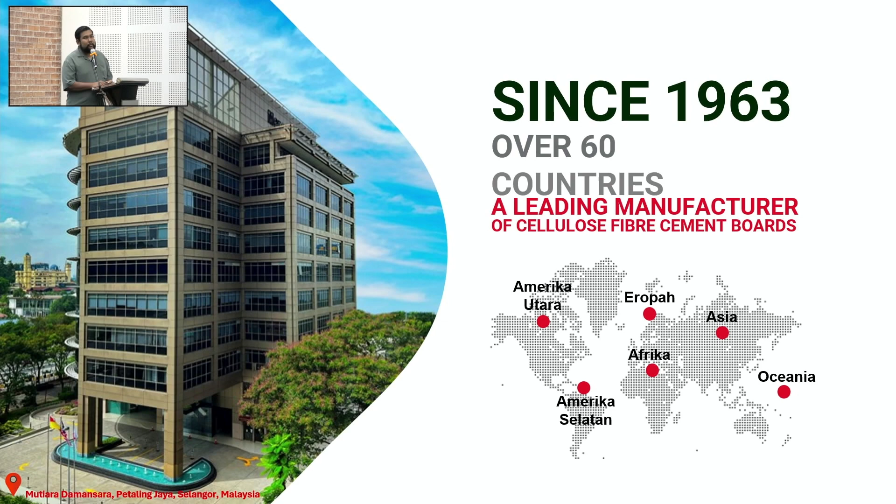In terms of our market share, UAC does 50% for local supply, and the other 50% we do for export.

Now we come to the products. Basically, UAC products have three main categories. The first is the flatboard series, which has become commodity at this moment in the market. We call it Superflex, Flexaboard and Vistaboard, which has been widely used for ceiling, and currently our market share is mostly external, because for internal ceiling applications, the market now prefers gypsum board, probably due to pricing, since cement board is a bit expensive, and probably because of the density.

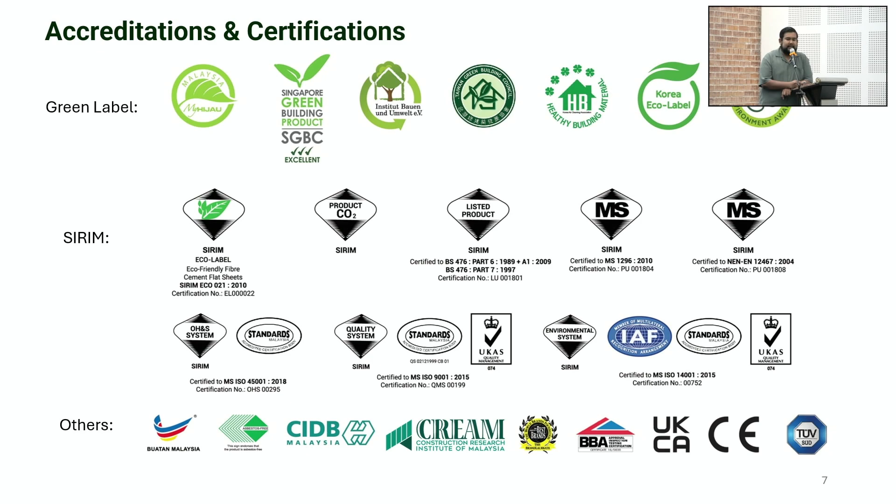And then we have SIRIM. As you know, in Malaysia we have SIRIM. Others include CIDB, CREAM, and the rest, as you can see.

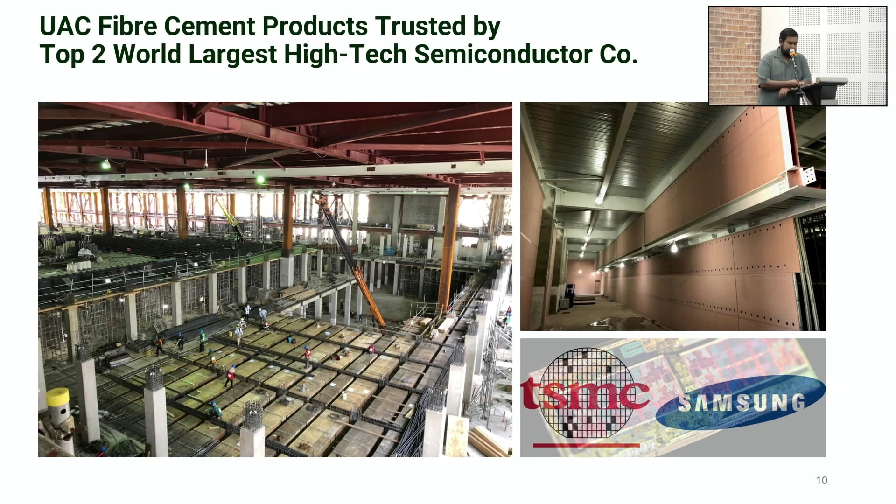Now, the current trend in Malaysia is data centers. We are heavily involved in a lot of data centers in Malaysia, especially in Johor, Cyberjaya, and Bukit Jalil. Later I will explain the reason why they are using UAC products for data centers.

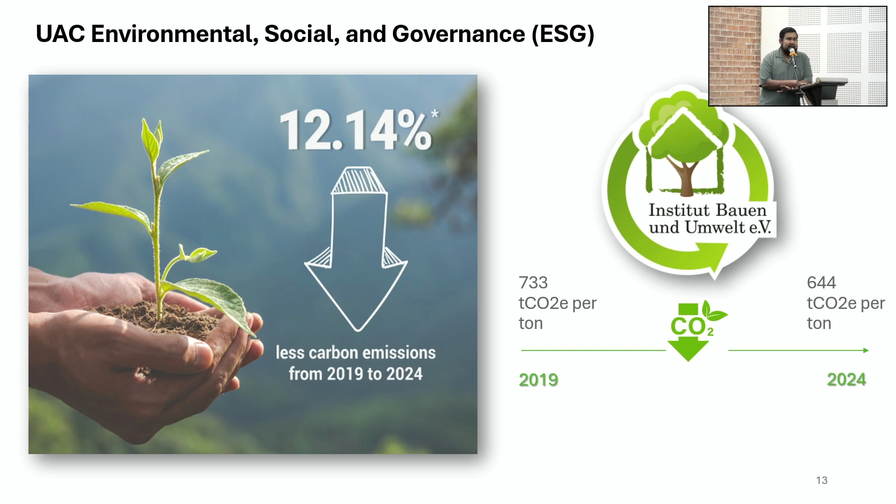This comes to ESG. From 2019 up to 2024, we managed to reduce our carbon footprint by 12.14%. This report is by Institut Bauen und Umwelt, part of our efforts to promote our environmental initiatives. We have ongoing current efforts, adding a solar system, and changing our boiler to natural gas, which we believe will help reduce the carbon footprint further. We target the equivalent of planting about 100K plants - that's the analogy.

This is our target, because now UAC and NG are in a joint venture together. We're making improvements at our factory to reduce more carbon footprint, targeting the equivalent of 100K trees planted, and to reduce about 1,800 cars' worth of emissions.

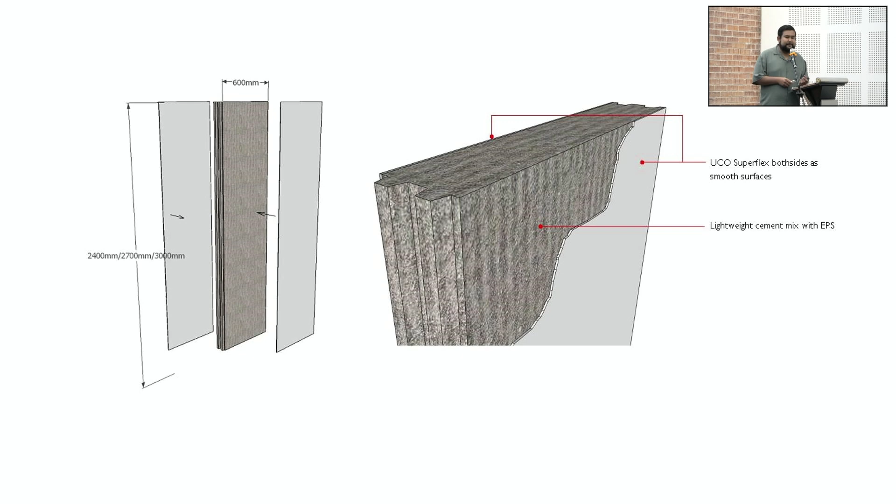Now coming to this solid panel. As I mentioned, fiber cement board used to be used a lot for ceilings, especially internal ceilings, but nowadays our market share has been lost there. So what we did was become innovative - we use our cement board as a skin for our wall panel. This is usually called a sandwich panel, or in technical terms, a lightweight wall panel.

Okay, this is the specification. At this moment, UAC, we are promoting two thicknesses in the market: 75 and 100. The width is 2 feet, 600 mm. And the height, we have three sizes: 2.4, 2.7, and 3 meters. Later I'll explain why this thickness, why not go more than 100 mm.

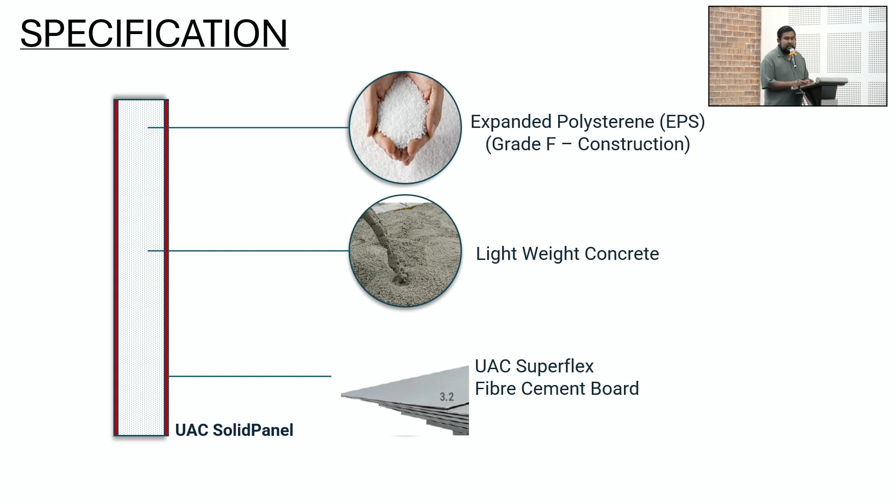The material itself consists, as mentioned, of the skin which is our cement board, and we have polystyrene beads used for construction material. It's grade F, not like normal polystyrene used for food packaging. Actually, it's for construction, and we have lightweight concrete. Both thicknesses achieve a 2 hour fire rating.

Sound insulation: maximum for 100mm we can achieve up to 43. To give some comparison, brick wall with plastering can achieve up to 41, so much higher, much better. For 75mm it's about 39, which is quite comparable with the brick wall system. We also have 4 hour fire rated, but that needs a double wall with a 50mm air gap. All this fire rating comes with Bomba certification.

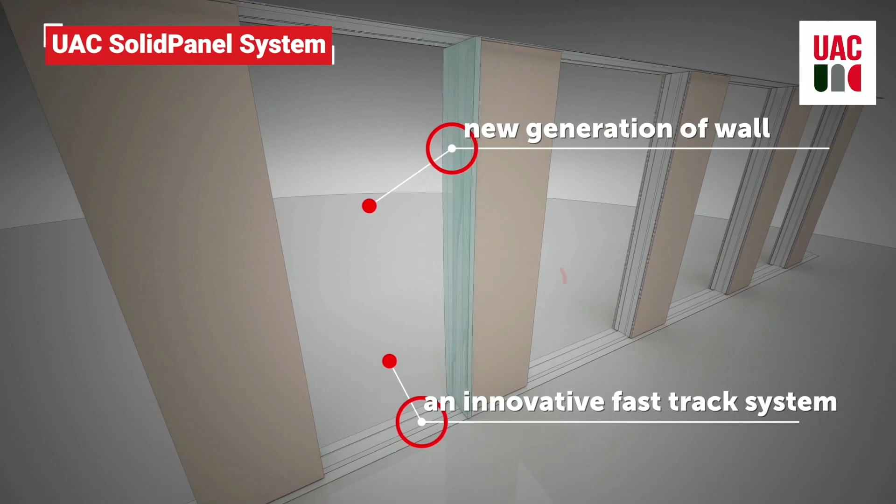Some video to show more clearly how they do the installation, for the new generation of walls using the latest and best construction technology.

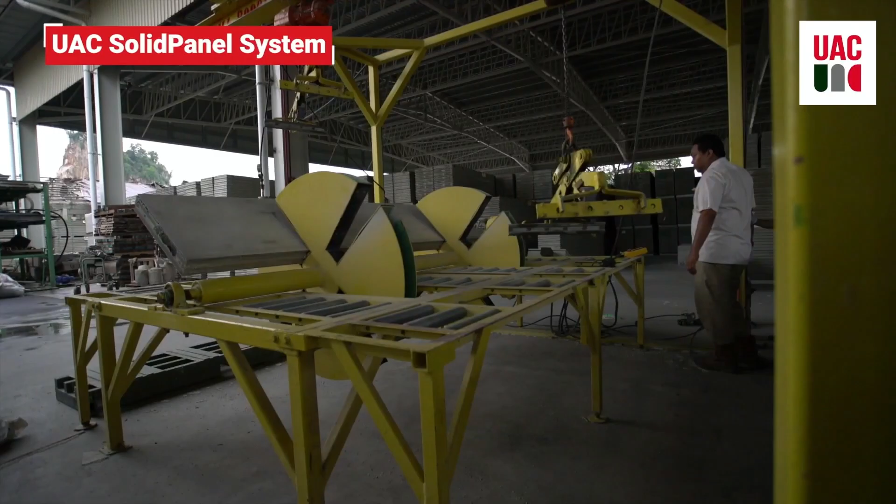The system is revolutionizing the way walls are built. UAC SolidPanel System is an industrialized building system, IBS, certified to the maximum score of 1.0 by the Construction Industry Development Board of Malaysia, CIDB. UAC SolidPanel System delivers benefits that surpass conventional masonry without the disadvantages.

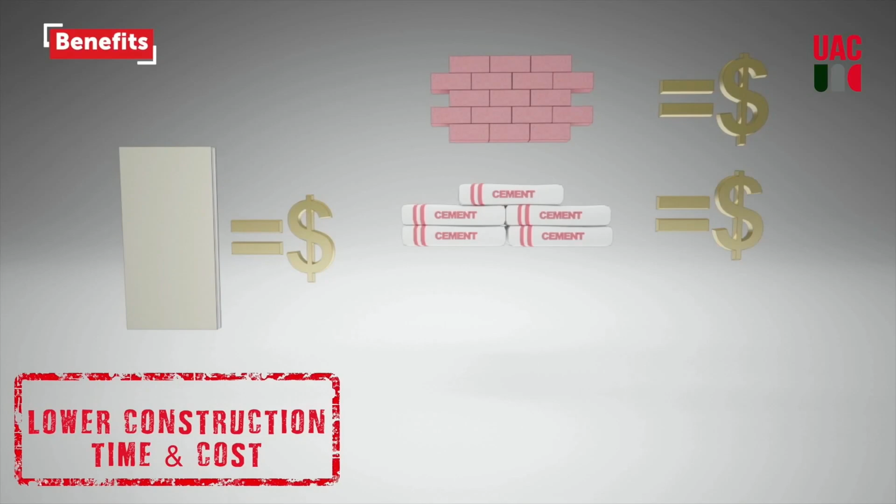Conventional masonry has many disadvantages: labor-intensive and slow, involves messy wet works, and a lack of skilled labor can result in internal finishing problems. It incurs expensive and time-consuming cleaning up of waste materials created by wet works. There are often delays with finishing.

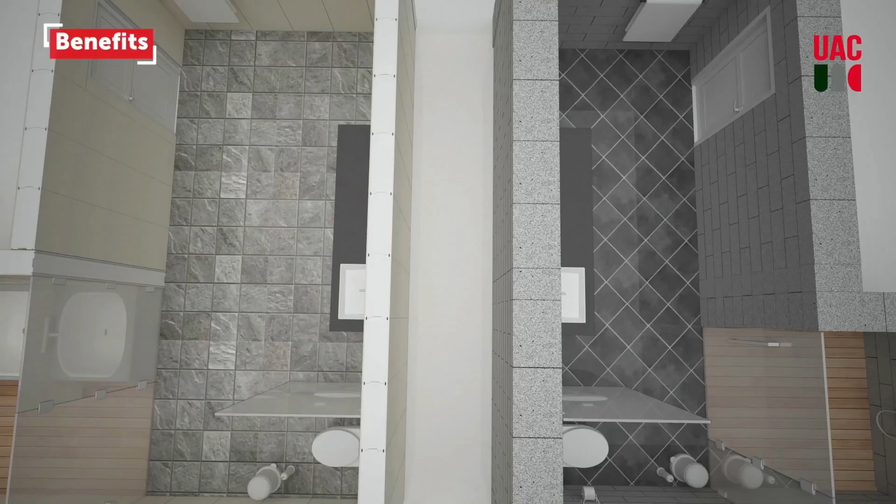In contrast, the system speeds up the installation process by up to 3 times faster than masonry. UAC SolidPanel panel is ready to be fixed, with good sound and thermal insulation. It reduces structural construction cost by being lightweight, and increases utilizable floor space through reduced weight and thickness of the walls.

Minimal mess at site improves cleanliness and enhances site safety. Simple jointing ensures a smooth finish. No rendering is required, and the result is solid and consistent quality.

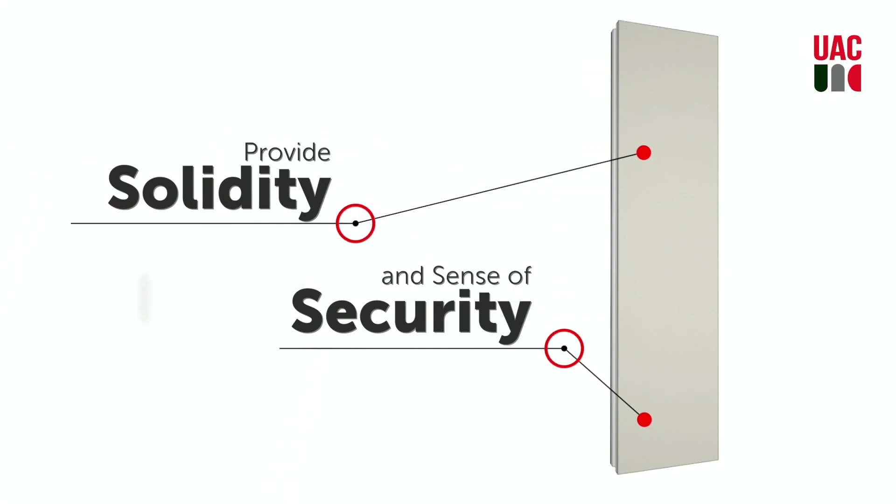Not only does the UAC SolidPanel system provide the solidity and sense of security of conventional masonry walls, it also passes the stringent and demanding requirements of wall performance tests under BS 5234 Part 2: the sandbag impact test, door slam test, anchorage test, heat and rain test.

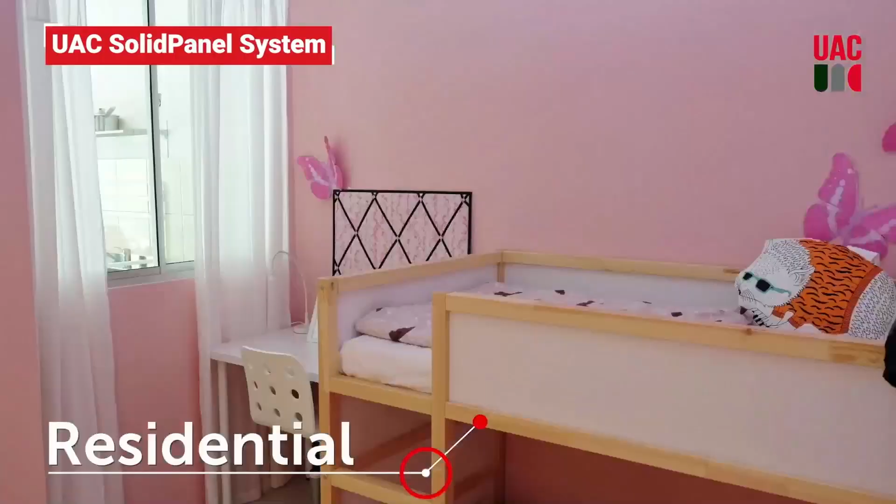The UAC SolidPanel system delivers lower construction costs, quick and easy installation, a flat smooth wall surface, solidity and resilience, and reduced waste. Its smooth finish makes it ideal for landed residential houses, high-rise apartments and condominiums, as well as commercial, industrial, institutional, and leisure properties. Being lightweight, it has the flexibility to accommodate all types of floor plans.

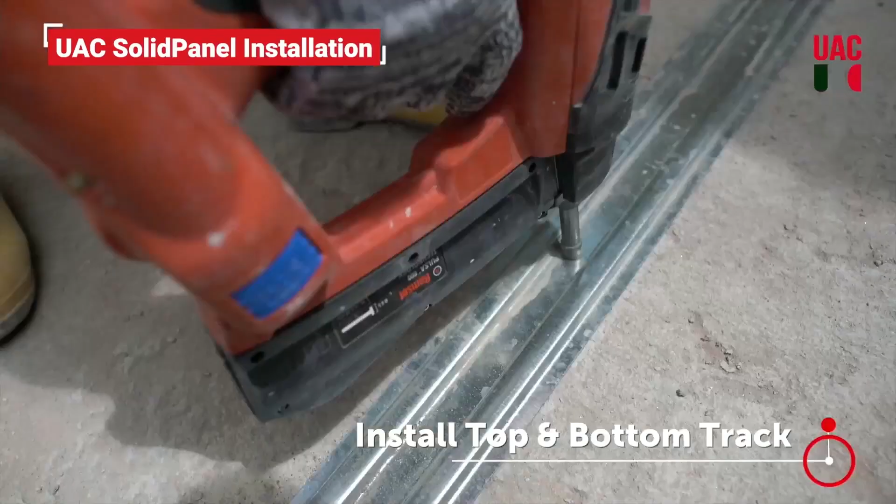The installation of the UAC SolidPanel system is as follows: plot the wall layout using a laser marker or plumb line and transfer the marks onto the soffit. Fix the top metal track to structural support and the bottom metal track onto the floor using mechanical anchor bolts or an approved equivalent fastener.

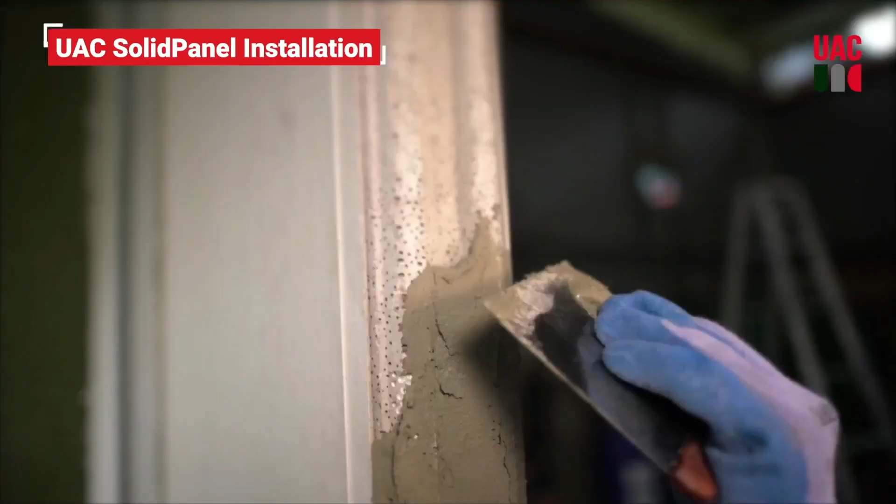Mark and cut the panels for installation. Move the panels into position. Tilt the panels to enable top tracks to slot into the cells. Mark the door and window opening to install the door and window frame. Install the panel. Insert rebar for the staggered panel installation method.

Plumbing and electrical services can be easily installed where required. Patch with cement mortar after installation. All joints are to be flush jointed with perforated paper tape and suitable jointing compound.

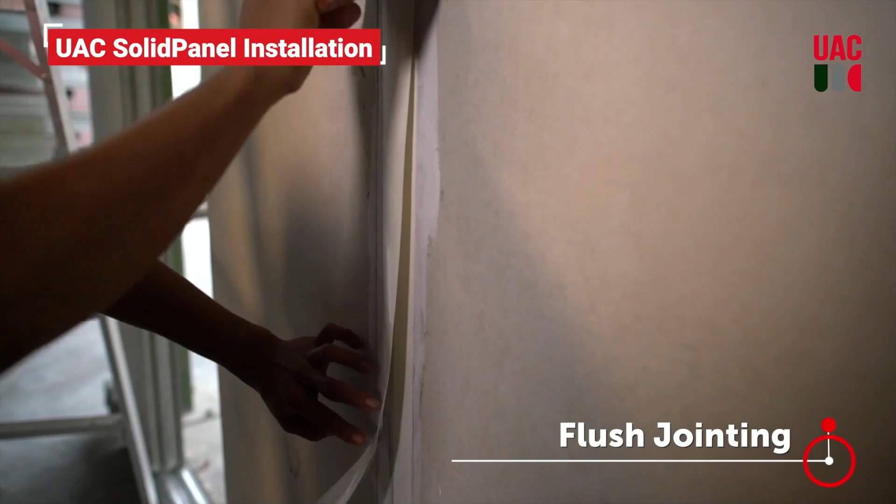For fixing with heavy anchorage, kindly refer to UAC's recommendations. When completed, the UAC SolidPanel system can accept a wide range of finishes, such as wall claddings, wall coverings, paints, and tile-on application.

Okay, that's the background, a bit the installation method and the benefits of solid panels. So I recap again the installation.

First of all, solid panel is usually a non-load bearing wall. But up to a certain extent, it can become load bearing, especially for single story bungalow houses. Later I will show you some project references. But typically it can be used as a non-load bearing to replace a brick wall, so we need a structure.

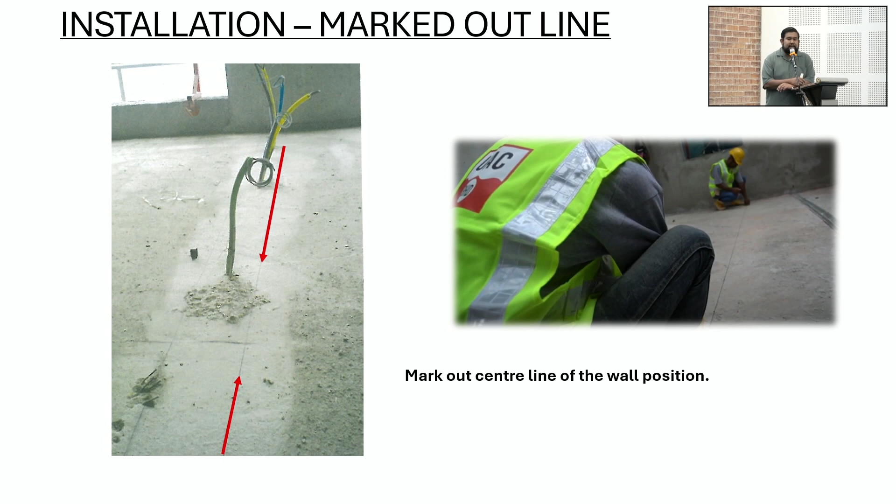So what we do is a marking, and then we install our bottom track. The reason why we have this bottom track is we want to ensure the wall has perfect alignment and perfect leveling, because usually the structure is not really that good. That's why we need this bottom track.

Followed by the second one, we have the top support. Usually we use this L angle because we want to conceal it inside the wall. There will definitely be a gap between the panel and the structure itself, maximum we allow up to 25mm. The gap is also filled up with our cement adhesive. This is the angle to fix on the top part, and the position of this L angle is actually in between the two joints of the two panels.

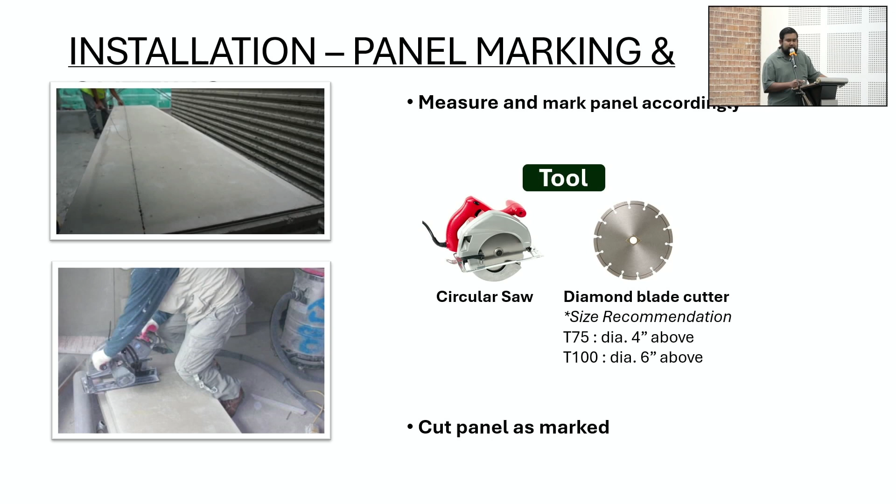As you can see in the video, the panel can be easily cut at the side. It's quite flexible using the right tools, which we always encourage - this Makita saw, a circular saw with a diamond blade cutter.

After that, we're moving the panel for installation. For walls more than 3 meters, we use a staggered installation method because our maximum height panel is about 3 meters. This is, for example, the panel arrangement for T75.

The maximum height they can go without any additional structure support, lintel or beam is up to 4 meters. For the horizontal maximum, they can go 6 meters. So after 6 meters and after 4 meters, we need the lintel and stiffener, either RC or steel. But most of our projects usually use steel as the structure, lintel and stiffener.

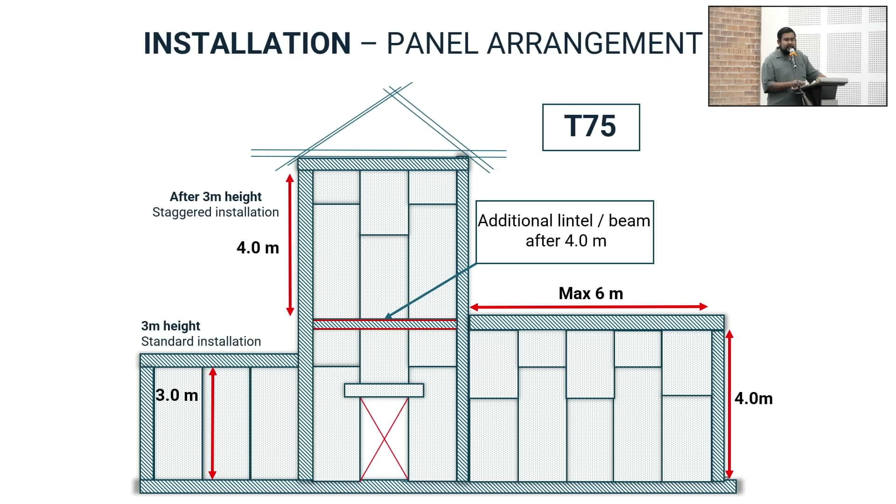Likewise for brick wall, usually we go 3 meter by 3 meter. For T100, the difference is the height - maximum height we can go is 5 meters. Whereas the T75 just now is only 4 meters; this one we can go up to a maximum of 5 meters.

And of course we have a UAC cement adhesive to be applied. The panel itself has tongue and groove - usually I call it jantan betina. After that, we join the panels together.

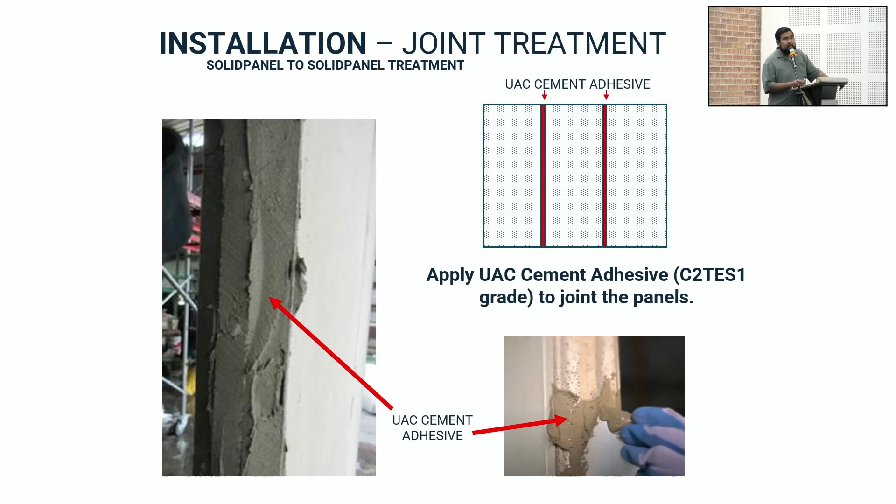I think this is very important - the crucial part for IBS product with a lot of joints is the cement, the cement gum. We are very focused on this area in our R&D. That's why we always encourage, and make it mandatory, to use our cement adhesive for the product. It cannot be used with any other product available in the market.

This is how we do the electrical and plumbing. We can manually cut, or another method we offer is when we cast this panel at our factory, we get the electrical conduit - only the conduit - from the main contractor to insert into our panel. So the panel comes with the conduit, and the electrical people just pull the wire through to put inside the conduit.

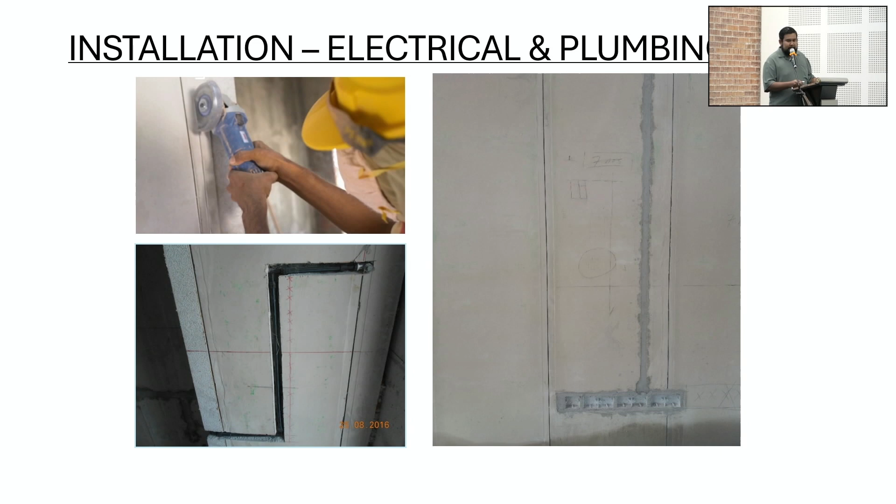The main advantage of this panel is that we use our cement board, which is the main advantage compared to the rest of the panels available in the market, as the surface is quite smooth. So what we do is just treat the joint similar to how we do partition works - I call this a flush jointing treatment, only at the joint area. After this treatment, we can apply the finishes, for example paint, and so on.

For the wet area, usually we don't do a flush joint because we have tiling. So we just apply the cement adhesive for tiling and put the tile directly onto the wall panel without the flush joint. Okay, this is typically how we do a flush joint.

When we join the panels, we will have a gap. The gap is important because we want to create an expansion joint between the two panels. The gap is about 5 to 10 mm. When we apply the cement gum, some of it will come out slightly from the panel. So the installer will pull out the cement gum to fill up the gap, and then we apply the first layer of our UAC jointing compound.

This is another important material that we always emphasize using our products for, because they have some flexibility. Followed by the fiber mesh, or they can use a perforated paper tape. But in my experience in Malaysia, it's very difficult to get skilled workers to apply the paper tape. Installers in Malaysia prefer to use the fiber mesh instead of paper tape. Then we follow with the second layer of jointing compound.

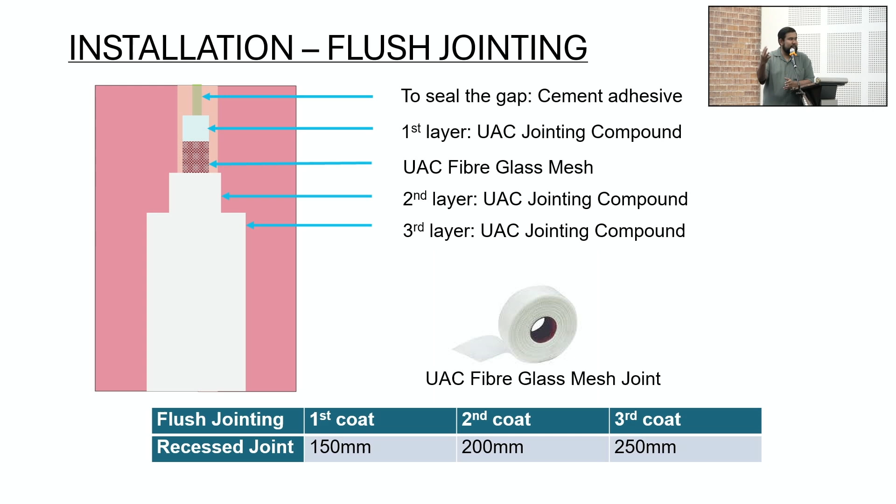This panel, they will pull it out wide, about 250. If they can get 300, much better. If they pull it a little bit wider, they can get a very seamless, smooth surface joint. That's their trick actually.

For the toilet area, our requirement is definitely to have a kicker to avoid any case of water ponding. We don't want water to seep through. We apply waterproofing as per the manufacturer's instructions. It can be cementitious or epoxy, but most of my project sites only apply cementitious waterproofing. This example, I think you guys are familiar with this area, is in Petronas, toilet and surau.

When we talk about anchorage, another common question people ask regarding the wall is about anchorage. We do our R&D with this Ramset. For those anchors below 100 kilo, you can use a normal wall plug, meaning the plastic wall plug, below 100 kilo. But above 100 kilo, we suggest using chemical or mechanical anchors.

For example, for a wash basin, we usually use a normal plastic wall plug. For DB boards, especially for hospitals which are quite heavy, more than 100 kilo, they use mechanical wall plugs. This is some example for this wardrobe.

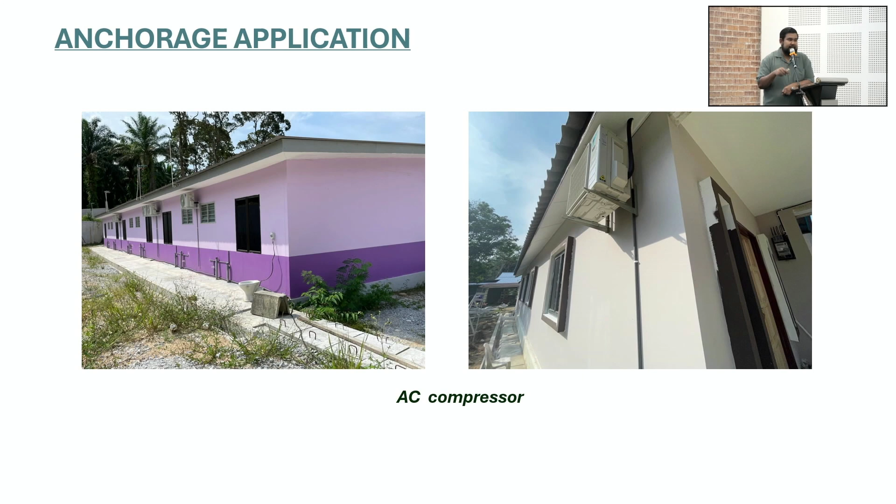This is another one, DB board, as I mentioned just now. This one also uses a mechanical wall plug. The OKU toilet can actually be hung onto the wall, no issue. Any points, you can fix to any points.

This is the advantage of the solid panel. First of all, we use less labor workers. I believe nowadays labor in Malaysia is also getting more expensive with the current regulations and minimum wages, which apply to foreign workers as well.

I think it will give a big impact to the construction industry. This is a good time for the industry to move to material that uses less labor-intensive methods. We allow fast track construction.

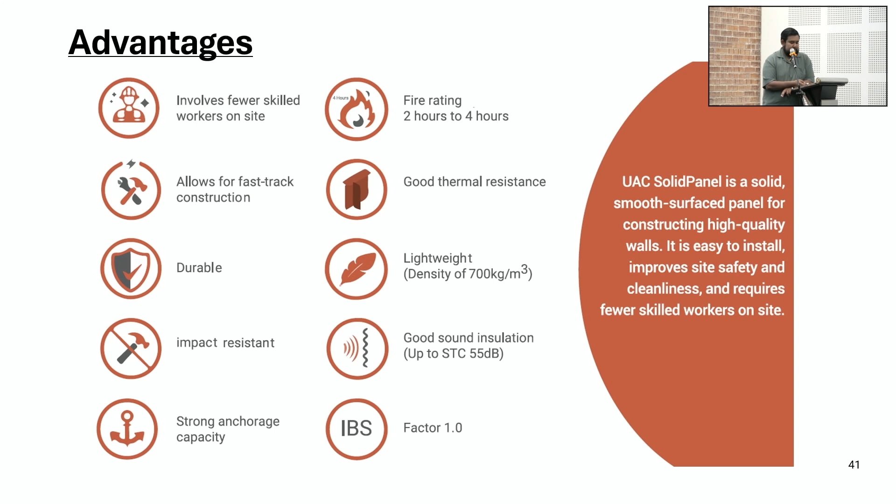And extra usable space - that's the reason why we promote T100 as our maximum thickness, and T75 because we want extra usable space. With this comparison, we can get up to 9% more because nowadays developers especially are looking for space.

When they hand over the project to homeowners, these homeowners tend to have ID works, and when ID takes place, it takes up more space. That's why nowadays they prefer to use a thin wall, so when ID takes place, at least the usable space is still there.

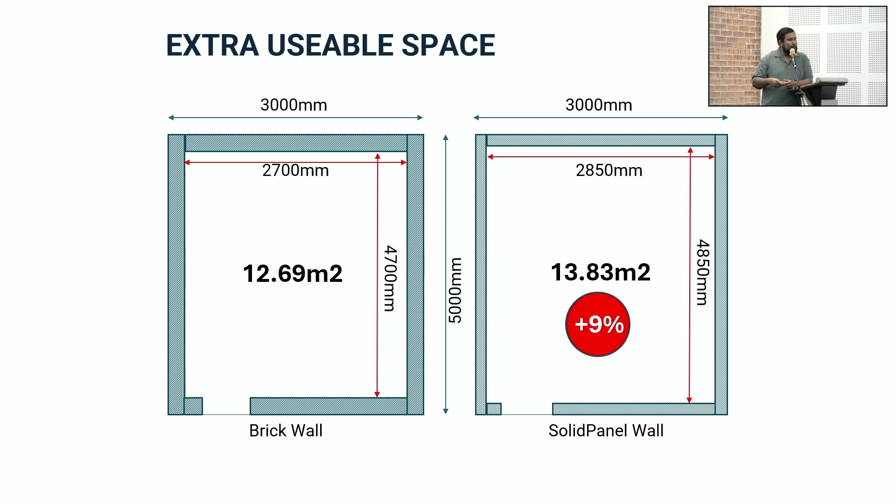So usually I encourage and promote to the architect that those common areas we flush it, and those bedroom areas we have that kink or gap because that can be covered by a wardrobe and so on.

In fact, now we are going to penetrate into Singapore. Singapore has a lot of stringent requirements - they have a toxicity test, water absorption test, and I think there are a lot of tests. So alhamdulillah, this year we managed to comply with all the tests, so we are going to get our COC to supply to Singapore.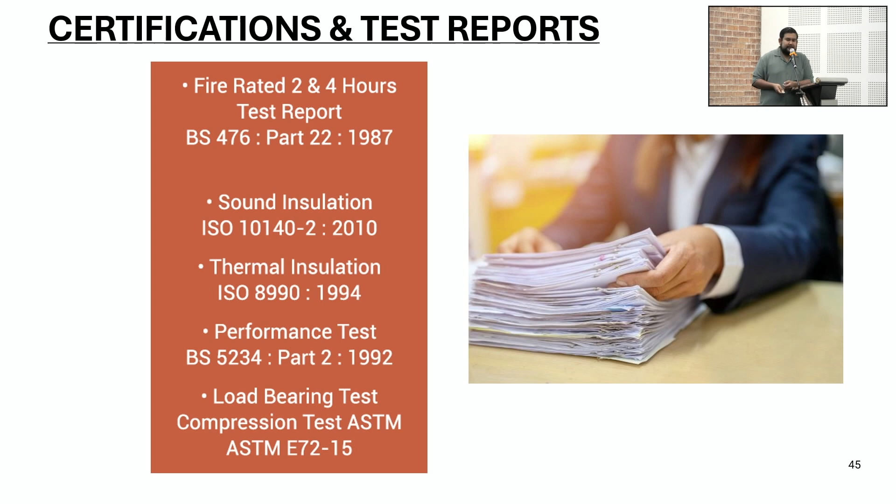There's also a green building score index - we have points for that. If you ask me, I don't know how to calculate it, but I know we have the points for GBI. And IBS factor 1, because it's under prefabricated wall panels.

This is our IBS certification from CIDB. I'd like to highlight, I think most of you probably know about this - for private projects, KPKT has issued a letter making it mandatory that IBS for private projects more than 50 million, with a certain gross floor area, must have 70 IBS score points.

Last time it was mandatory only for government projects, now they've made it mandatory for private projects too. So when you submit the building plan, they must have those 70 points - just sharing this information. But usually for wall, it only contributes 20%, and I think the most is from the structure - structure is about 50%.

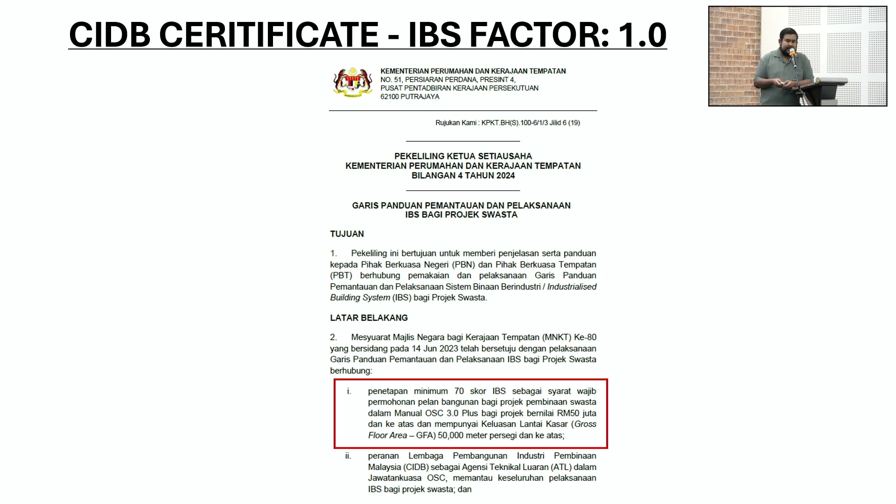This is our fire rating certificate. The only issue we have, as you can see in this certificate, is it cannot be used as a party wall. The reason for this is the bylaw - I've sat on committee members to try to change this clause, but unfortunately until now we cannot, so we decided to adapt.

The reason why, is that in the bylaw they mentioned it must be masonry or RC, and our material doesn't fall into that category. In terms of thickness, for residential, minimum thickness they allow is 100mm. In terms of fire rating we comply, but in terms of the material itself, it must be RC or masonry - that's the reason our material isn't under that category.

And then wall performance test, we test at TUV, BS 5234, and we pick the 75mm, the thinnest wall that we have, and we go for the severe duty. This is a part of the test, we have the full test report.

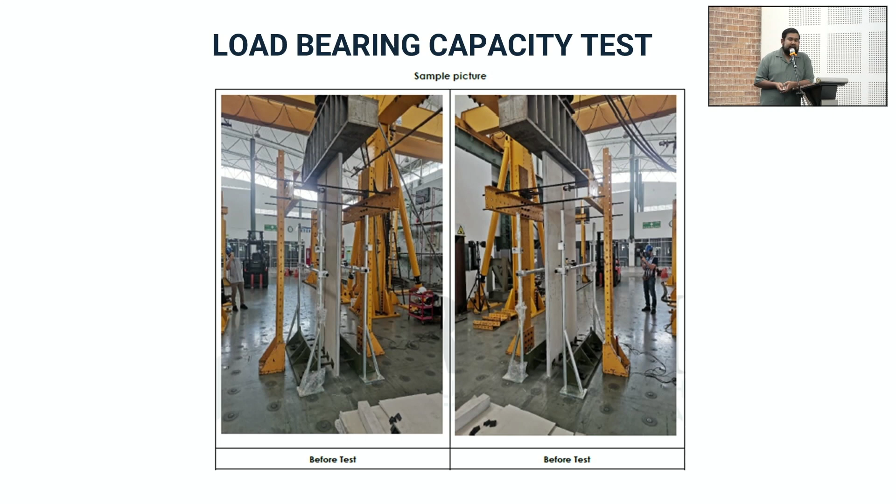And this is a load bearing capacity test, at CREAM, CIDB lab. This shows the pictures of how they do the test, because they put the load on top of the wall panel without the structure. The load that we apply is about 259 kilonewton, which is about 25 ton load. The analogy is we want to have like the roof load on top of our wall.

This is some comparison. In terms of weight, we are about the same as the block wall in the market. But in terms of productivity, we managed to achieve 30 meters square per man per day, because we don't have any plaster, we don't have any skim coat. And the sound insulation is about 43 for the T100.

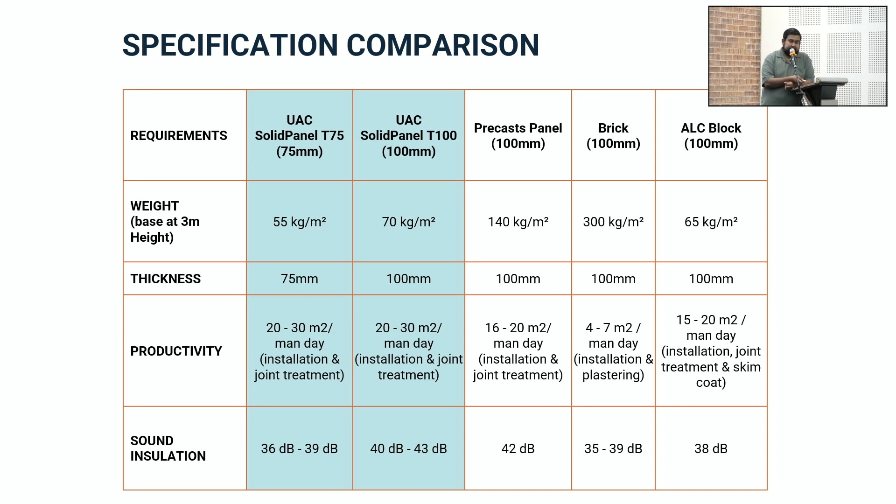Fire resistant 2 hours and can be up to 4 hours, but need to have a double wall. And for the electrical services, it can be manual or can be pre-inserted during our production process.

Surface appearance is a smooth surface, and flexibility of relocation - it can be reused, it can be replaced. We have a lot of projects, especially for malls, where when they complete the wall, they hand over to their tenants. The tenants tend to do renovations. So for wall panel, when they cut, they can get up to 50%. They can be like block size, so they can use it back to build a new wall.

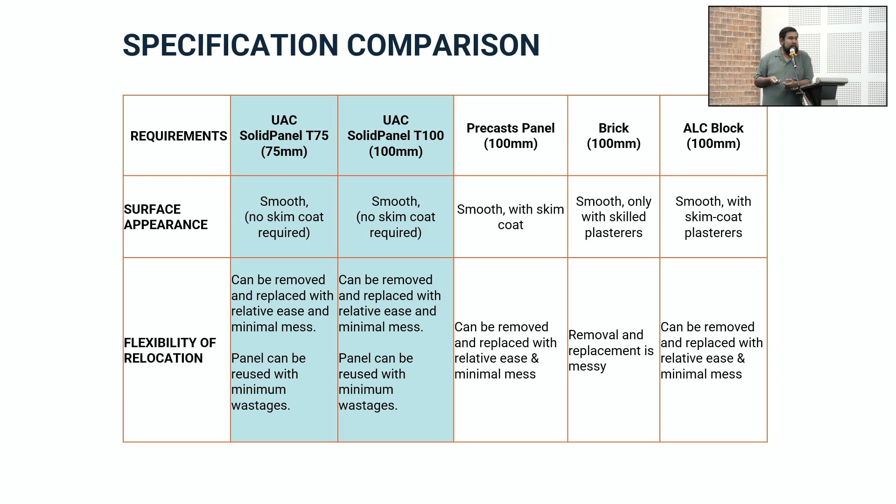So that's how the wall panel can be reused, but the cut must be nice.

Now we come to industrial projects. When I had this title, I didn't even know how to share on this industrial topic. But just to share the experience, why they choose this panel to put into industrial projects.

These are some of the projects that we supplied. We have a bridge data center in Sedenak, Princeton Digital, YTL Green Data Center, and some warehouses, Gamuda factory. When they set up their factory in Banting, Gamuda IBS, so we supply our panel to build their factory. And Shopee warehouse in Bukit Raja and ALP warehouse. Now comes these pictures, Gamuda IBS, and you can see the Shopee warehouse.

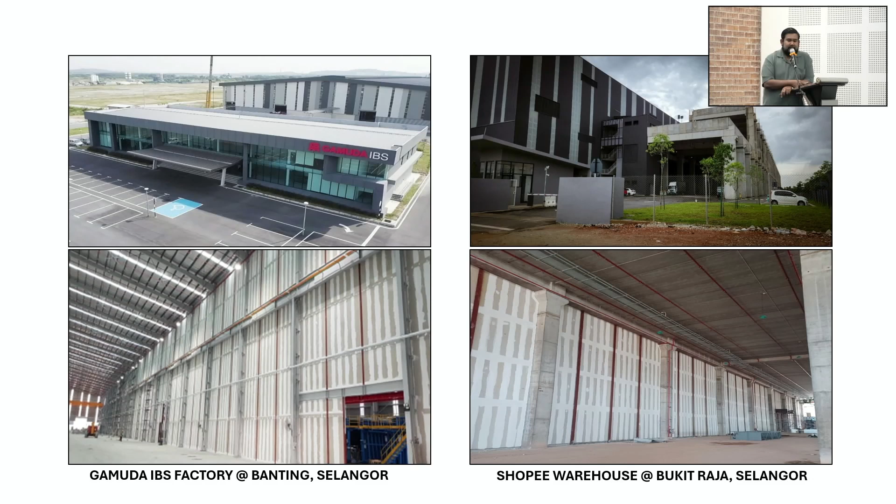I think the first requirement for industrial, most of the wall is high wall. As you can see, it's really high. Our record is about 12 meter to 15 meter. So as you can see, the advantage of this panel - just imagine if you want to plaster or skim coat a high wall, I think it's quite tedious.

That's one of the reasons. And in fact, for this high wall, definitely we need another structure support. And as mentioned just now, our T100 can go maximum 5 meters. So at least they can reduce the number of additional structure supports.

So after this stage, they can apply the paint. There's another one, Top Glove.

So we approached Top Glove during COVID. We know they are the ones making money, they are the ones who could operate. So we approached them, and yes, it's true, they were spending during that time. So they wanted to have a fast track construction. In fact, we are also using their license as a supply chain effect to operate our factory.

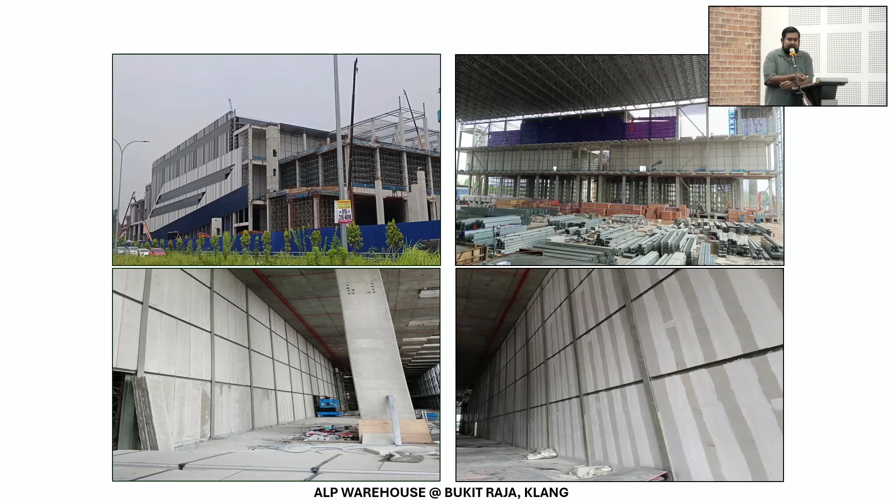There's another one, ALP. Also, as you can see, is high wall. But this client decided they wanted to reduce the wastage. They made the stiffener, the structure, 3 meter by 3 meter. Because our panel size is, the height is 3 meter and the width is 600mm. So they wanted to reduce the wastage, so they made it 3 meter by 3 meter. This is subject to the client's requirements.

This is a bridge data center. It's another one, also high wall, and the project needed to be completed within a year. I once read an article that this data center, with a size of 5 megawatt, their revenue is about USD 600k per month - that's their revenue. So basically, they really need to complete the job very fast. So when they can complete very fast, they can operate, so they can get money. That's how it works.

Another one is Princeton Digital, a data center. Actually it's quite a straight wall, a high wall with a lot of lintel and stiffener.

Later I'll share the challenge part.

This one is YTL. As you can see, the left hand side is a block wall in the picture, and the right hand side is our panel. So our panel is ready to be painted, meanwhile for the block, they need to apply another skim.

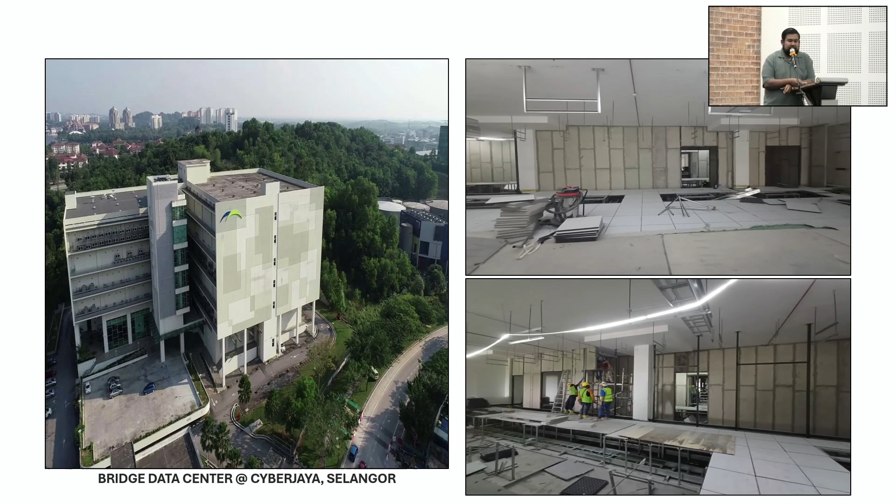This is for renovation in Cyberjaya, also can be applied for those renovation works. Without much disturbance because it's still under dry construction, and they want to have 2 hours fire rating, and definitely data centers consume a lot of energy, especially electrical and water.

So the reason they are using this panel, one reason is because of the thermal insulation and the energy loss. The second part is because it's lightweight — just imagine installing those high walls, definitely they need a lightweight material. So I would say it's installer friendly.

Likewise, if those heavier panels are used, it's quite difficult to do the installation. Can be done, but it takes time.

The challenge part for this data center is definitely they are looking for a fast track project. And the second one is because they use a lot of stiffener and lintel.

The challenge our part is the termination joint. So actually UAC, we have developed the details for the termination joint between the panels and the steel structure, because steel is quite sensitive. So we have an epoxy product that we are promoting in the market.

But unfortunately most of these projects are not using it. So we have a very big issue with those termination joints with the steel structure, because the projects like to have a seamless joint.

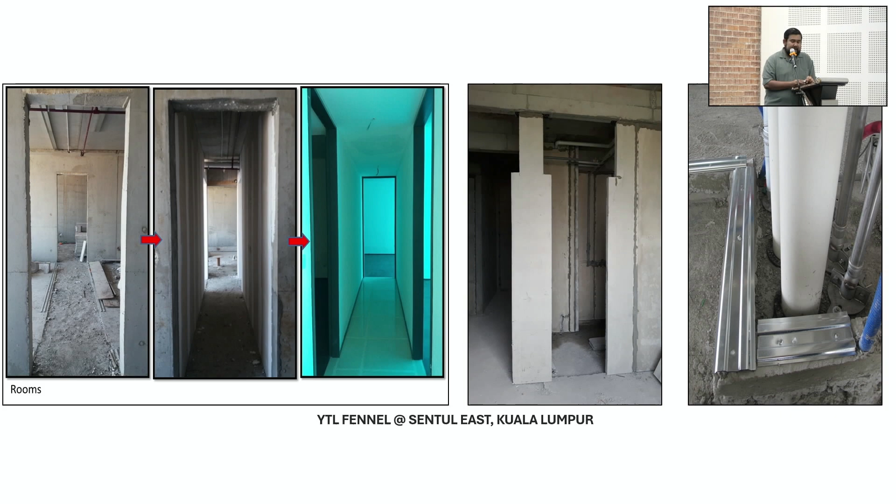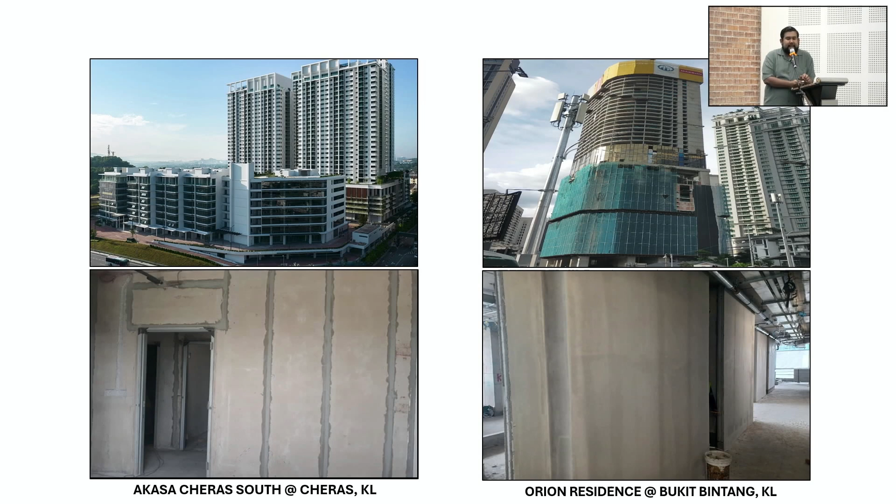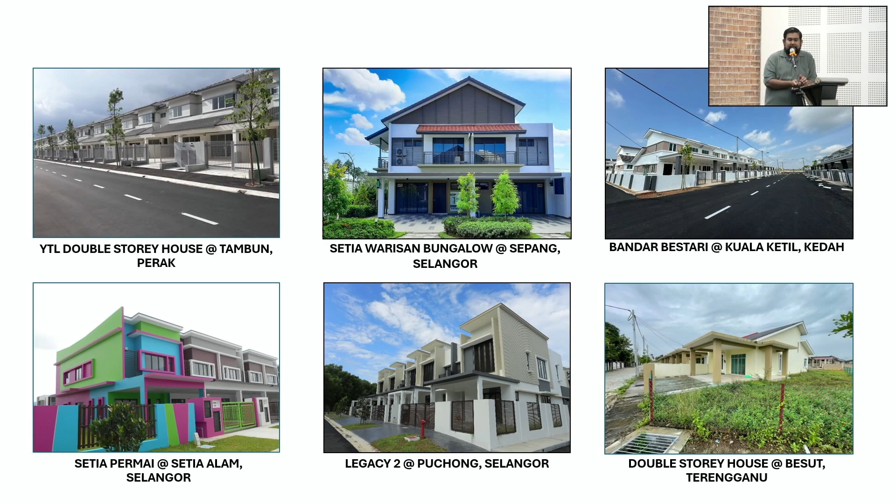This is among Genting Condominium, Genting Highland. Akasa Cheras South, this one under Hapsing. Orion Residence is our ongoing project now in Bukit Bintang, I think at the back of Star Hill. Lexa Resident, and this in Penang, Urban Suite in Penang. And landed house, we also have YTL, some SP Setia project, Legacy 2 Puchong and double story house in Terengganu. So the house, most of this project, they are using for internal, for landed.

At this moment, we only have one that is used for internal and external. For external, we recommend to apply full render, to have a full render for external. For internal we can apply a normal flush joint, but for external, apply the full render system.

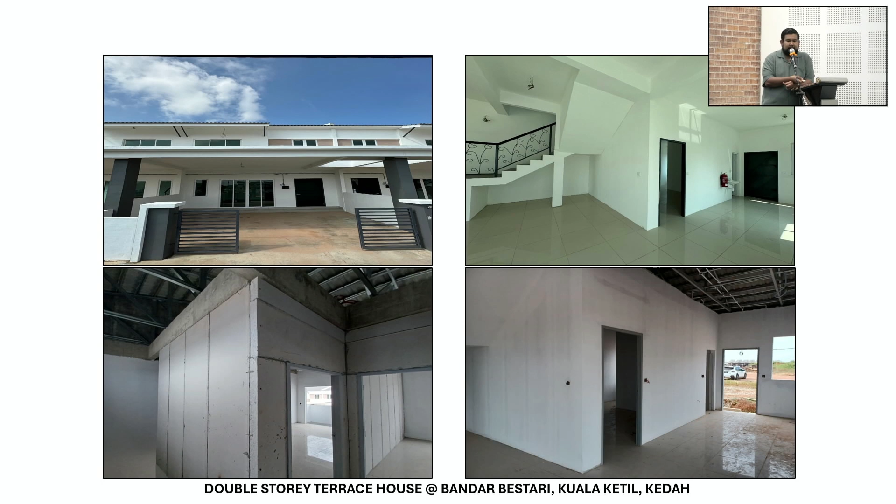This project just completed, it's actually a low cost project. The developer sells it for about 150,000 only. It's actually a double story, in Kuala Ketil, Kedah. This project uses internal and external panels. We saved this project because the developer had an issue.

You can see in this picture, they were using some sort of precast system, but they had an issue there, so they asked us to continue. Because in East Coast usually they have boutique developments, about 10 units, 15 units, that kind of development, so we supply a lot to this kind of project, especially at the East Coast.

Terengganu and Kelantan. And for this project, a single story bungalow type, this is PPRT under Kementerian Kemajuan Desa dan Wilayah. For this project, our panel becomes load bearing. Like I said earlier, to some extent our panel can be designed as load bearing. The house build up area is about 660 square feet, and the cost is only 66,000.

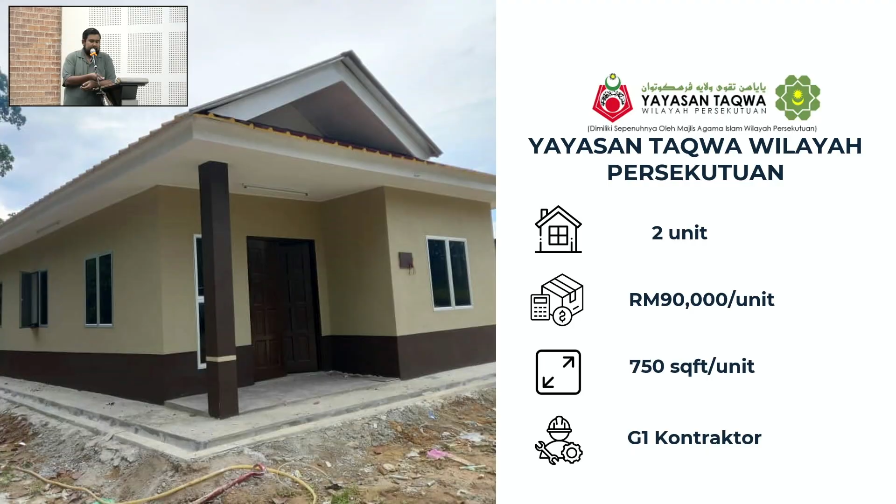This is another example. For commercial projects, we also have Royale Chulan Cherating and Forest City Golf Hotel, because now Forest City has their own IBS.

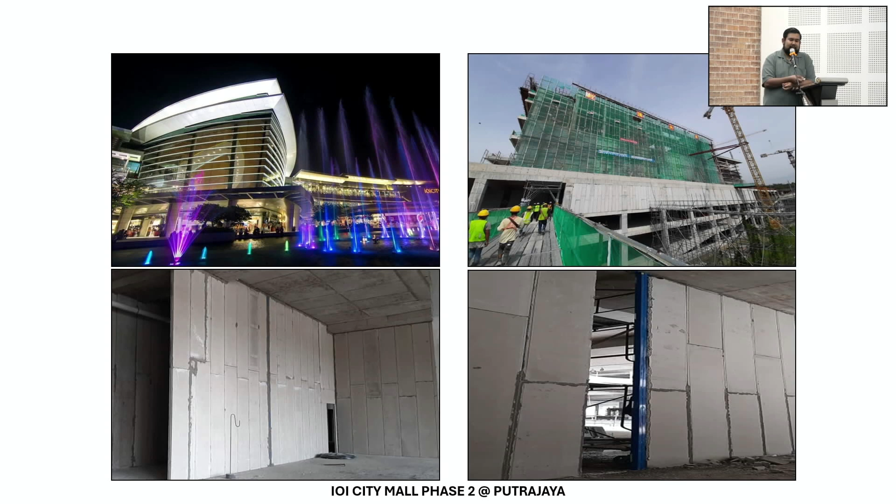Before that, we were the one supplying our panel. Now they are using all their own IBS. And Menara Bostador, and some commercial projects in Sabah. We have Water Chalet, MBO City Mas, IOI City Mall phase 2 - actually this IOI City Mall internal wall, the new wing, all using panel.

But now they do a lot of ID works, so we really cannot see it anymore. Probably Menara Bostador, Mutiara Damansara, Jalan Raja Chulan area.

And this is our ongoing project on top of TRX Mall, we call it Kimpton Hotel under Lendlease. Now because of this project, they require a higher STC of 55 because it's a hotel. So what we propose is we need another drywall system where we put in stone wool. We combined it together and did the test, and we got this STC of 55.

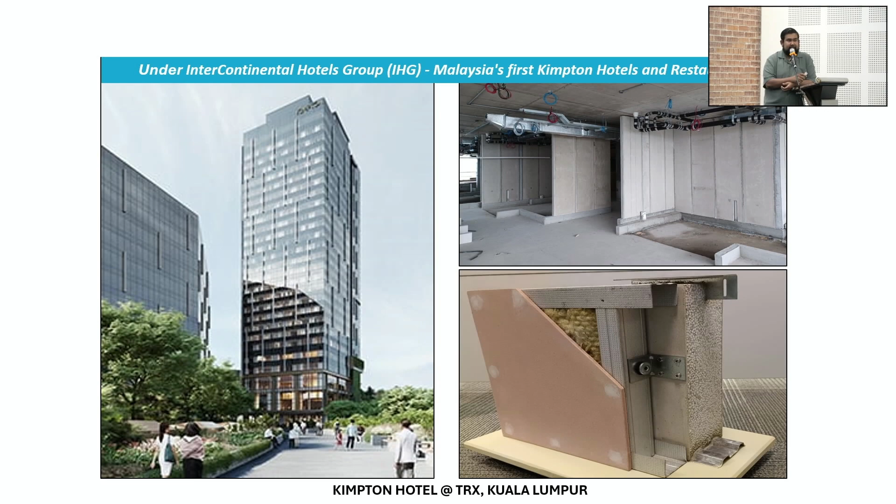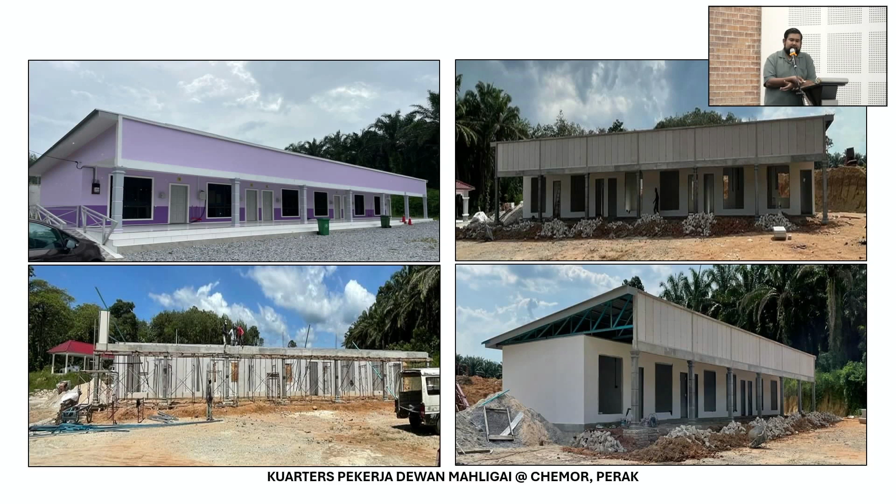This one is Workers Quarters, quarters pekerja. We also have a lot of projects where they have their own land and want to build rumah sewa, rented houses. So they build like this, and the house can complete within 3 months, so they can rent it out and get the money.

That's one - modular construction. UAC is not a modular construction company, we are not a modular supplier, but we work closely with all these modular construction players. We supply our panel as part of their components.

This is one example when they built workers quarters for Petronas Pengerang, at Rapid Pengerang. They built it like a container design, so we supplied our panel as a wall component. They transferred it to site and stacked it two levels like that, so it looks like a resort - now they open it as a resort.

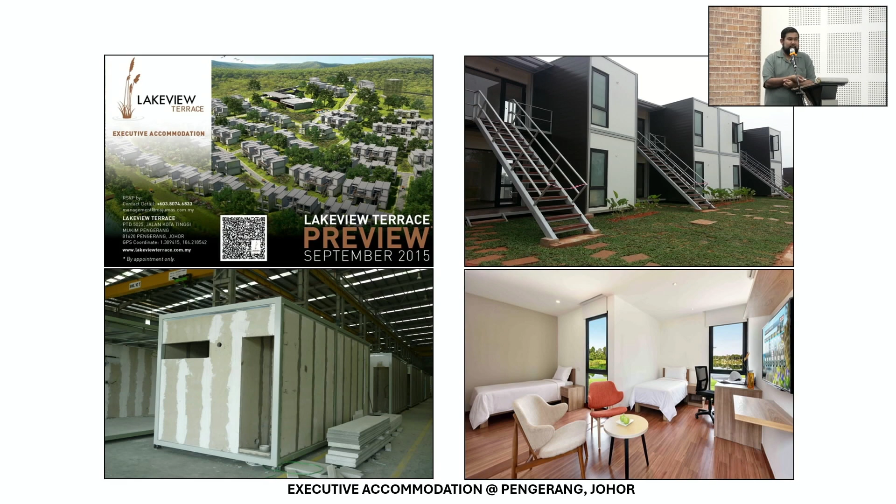There's another one in the complex at Pengerang itself. And Petronas, nowadays when they want to build their petrol stations, they use modular construction.

This is a tiny home. We have our sample house at USIM Nilai, because for this program we collaborate with our customers and do a training program with university students.

Some project references - you can see some school projects. Actually we have a lot of school projects. Hospital projects too - it can also be used for hospitals.

Because for hospitals, I think the most crucial part is the M&E, the complexity of the M&E. So that's the reason why they use panels, because the panel can be cut, so the electrical work can be easily fixed and penetrated through the wall.

Some army camp quarters - we supplied for a MINDEF project.

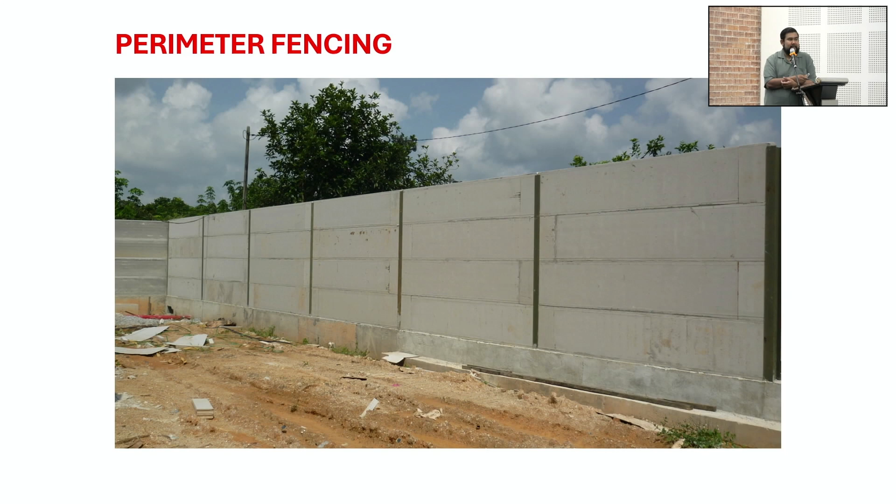And perimeter fencing, especially for our retail, because we supply through our distributors. Our distributors keep stock because of this kind of project, like fencing for private houses. This one, we want to penetrate into KTMB.

They want to build the fencing, but their main requirement is actually anti-vandalism - they don't want people to easily break down the wall. So they do some tests for this.

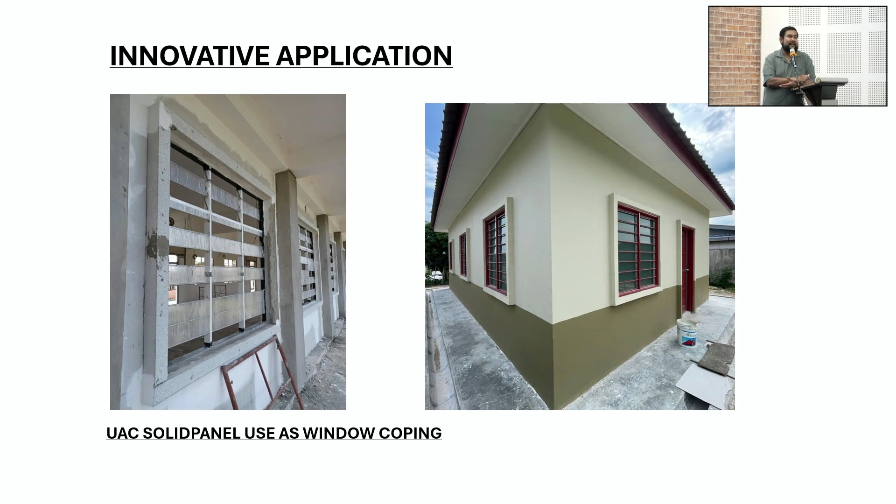Innovative application can be used as coping - those wastage panels can be used as window coping. So actually the right hand side is a rumah PPRT, but when they put the window coping, the house looks a bit premium. Without the coping, it looks really low cost.

And fin wall - nowadays I also receive a lot of inquiries from people who want to do a fin wall, but definitely for this one there's a special design involved. This is another example.

And some overseas projects - this is some of our overseas work. But for these overseas projects, what UAC does is we supply our board, not our panel. We supply the board, and in that respective country, they build the wall panel similar to UAC. We share our technology with them.

In UK, Taiwan, all these are using our UAC board, because for us to export our panel, it's quite a bulky size. In terms of logistics too, it's very expensive, because per container they cannot fit too much. So we just supply our board.

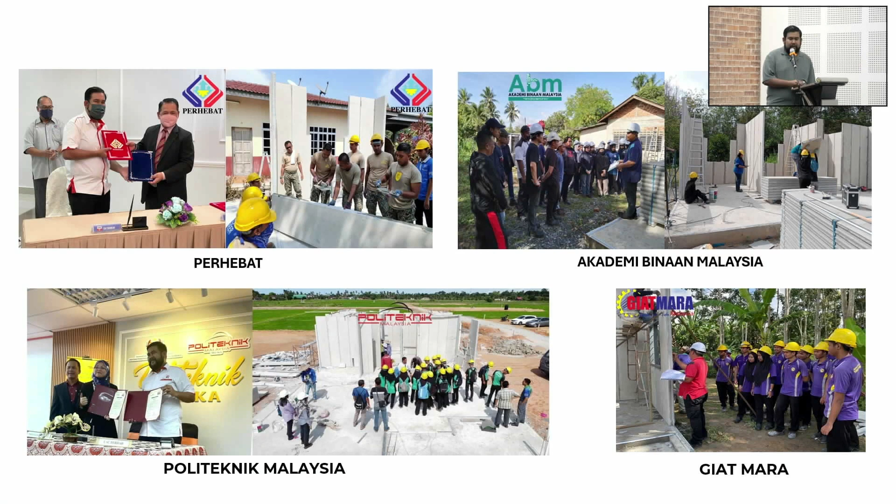We believe in human capital development, because if you have a good product without good workmanship, you will have a big issue. So we collaborate with all these TVET programs. We teach them, instead of building a brick wall, you build a panel. We target that in future we will have a ready skilled workforce to install all these panels, and hopefully one day this panel can become a commodity similar to a brick wall.

That's my objective. We do a lot of programs like this, putting real site programs so students have good exposure. This is Aircrete, a little bit on the Aircrete.

This Aircrete, the difference is we put the BRC inside. You can see, no more fiber cement board skin, it's BRC inside with what's called aerated concrete, a mixture of sand, cement, inorganic filler and additive. In terms of density it's a little higher, 900 kg per meter cube, as compared with the panel now which is about 700 kg per meter cube, because there's no more EPS.

The reason why we have this Aircrete is because we want to comply with party wall requirements. So we focus on the party wall. We want to complement the products with each other.

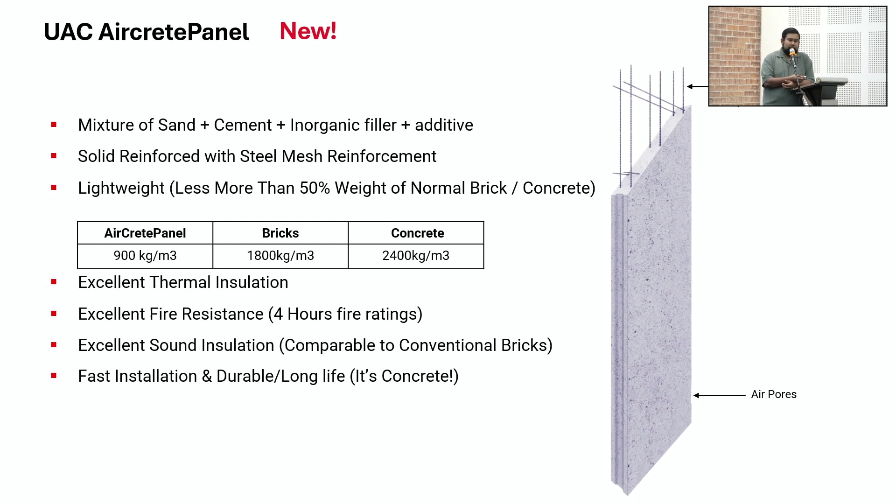This Aircrete, we have gotten the Bomba certification, which allows us to apply for party wall. In terms of thickness, we have 100 and 125. For party wall commercial buildings, we cannot go with this, because commercial needs 225.

At 225, if you make it as a panel, it's not installer friendly, because it will be heavier and difficult to install. So that's the reason we go up to 125 only. We focus on the residential sector.

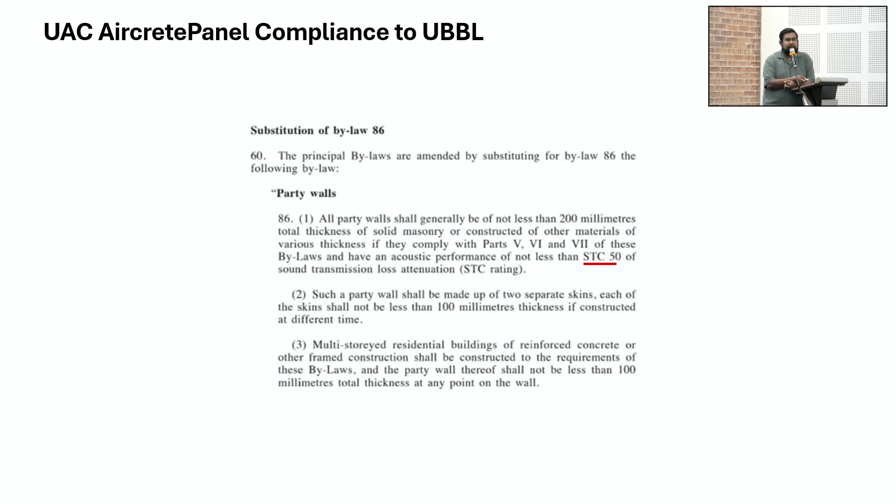This panel can also be used as load bearing for the wall. This is the certificate attest report we have from Bomba to comply with the party wall requirement. In fact, for STC we also have 50, we've tested it. Party wall requires the STC to be 50. So we have that, we've already tested it.

In conclusion, basically for this IBS wall panel, lightweight wall panel from UAC, you have high quality wall finishing. It's definitely fast track. It's lightweight, so with this lightweight you get savings in terms of structural cost, and installation is easy, less labor intensive, improving site cleanliness.

At the end of the day, the wall must be strong, solid and durable. Because when I bring visitors, wherever they are, they look at the wall first and they will knock on it. That's standard, they knock first. So when they knock and feel it's solid, then it's okay.

I believe we still have a problem with drywall in our mentality. Some countries have moved to drywall, but when you knock on drywall it's hollow, so people think it's not safe, like a cheap wall. That's the kind of mentality. That's why we still promote solid infill.

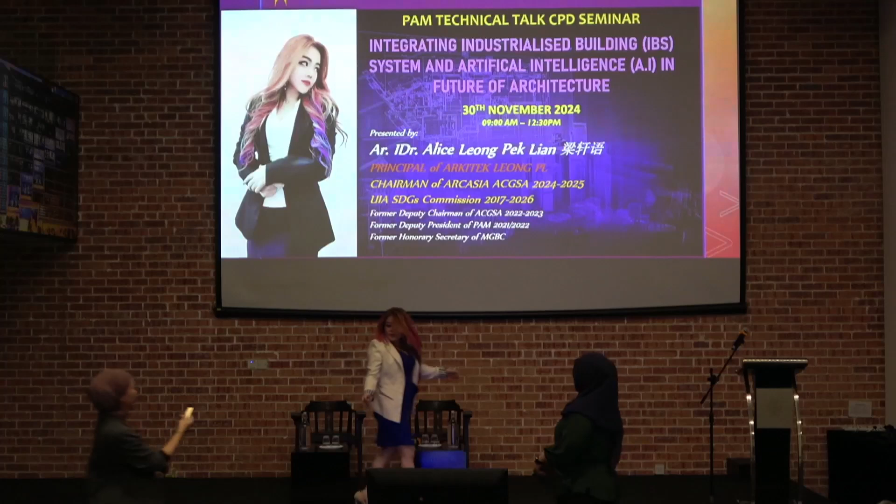We are still in the morning. Good morning everyone. Some of you may know me, so thank you to the MC for the short introduction about me. Thank you so much, and it is my honor to be invited to give a talk at PAM. I just came back from India.

They also invited me to speak at the International Women Architects Platform conference. In those sessions they had a lot of topics. There I also shared, but not related to IBS—I shared on artificial intelligence, AI, and also for future architects. But it's a very short talk, so 20 minutes, not much I can share about what I wish to share with our own profession.

I think a lot of people have heard about IBS, AI, IT, but what will really be the impact that we haven't really explored yet. A lot of people fear that AI is coming very, very soon, especially since Elon Musk has invented something, and in China also they have this kind of thing, slowly replacing some industries and jobs from certain groups of people. So the fear is people asking, what about our field, architecture?

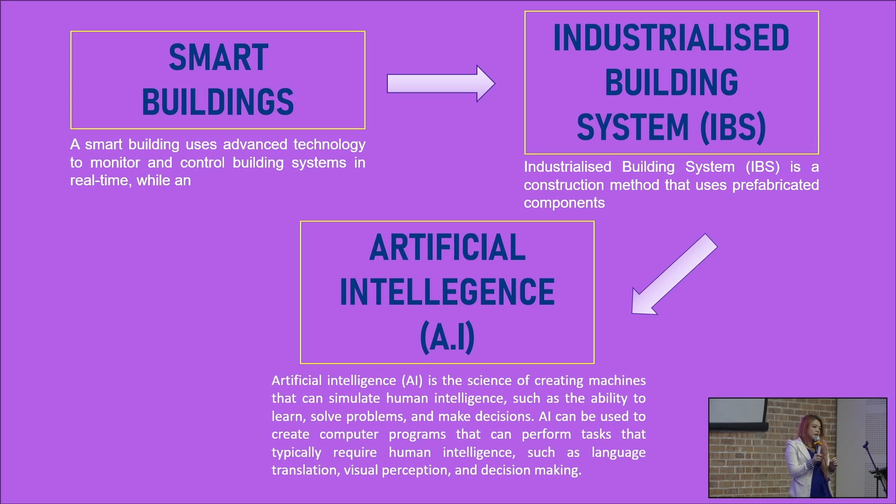To me, it's not so intelligent yet, but it's proven. They will give you the programs or whatever answer has been programmed in to answer the question you ask. So we go slowly, slowly.

Smart buildings, we know already, and this is what we are focusing on. I look at it more like a green building, a more sustainable and more intelligent building that helps us monitor and control the entire building in a comfort zone, and at the same time provide data and help cut down unnecessary things that create discomfort to humans, and also help us do cost saving, because you cut down electricity, you cut down energy inefficiencies. That's why it offers you cost saving.

So collecting data is definitely a yes for a smart building, because you need that to monitor. It's proof of your performance. Day by day, week by week, month by month, you know which system has failed you. So of course, heating, cooling, lighting, plumbing, access control, and security—these are quite normal. You're not just applying it in commercial buildings, but also in residential.

It's amazing, if you go to certain countries. Now it's not just applied in your home or house—they are everywhere now. Even the cars they bought, the car itself can speak. They can monitor your face, your reactions.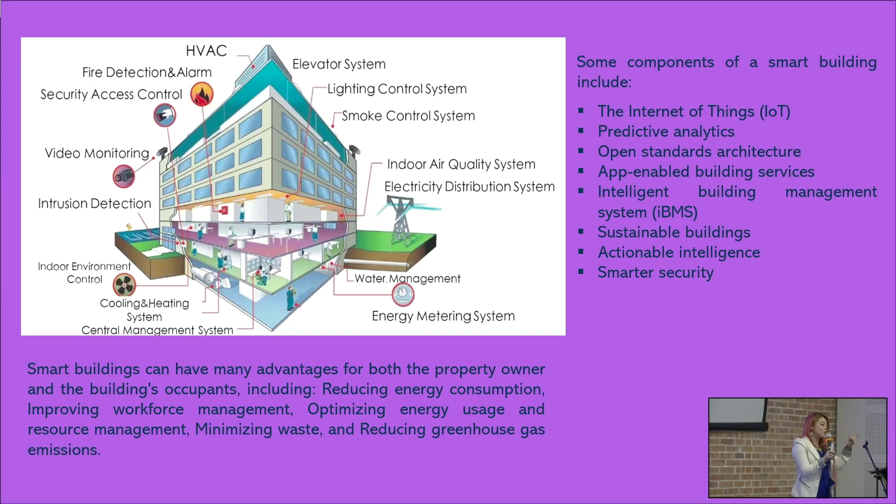To me, a very successful architect is one whose building performs so well, functionality and practicality, it doesn't fail you. Your clients don't come back to you again and again about problems - we do not have time for that. So when you finish, it's done. They won't come back to call you because of this kind of problem. They will come back to call you because they want to offer you another new project. That is the one that we want.

See, so the IBS system - I think Hafiz has explained it very well, the whole session very well. But this is not a new system, it's been around even before the pandemic. And that's the reason that in Malaysia, compared with many other countries, Malaysia is not that fast to adopt things like that, because of, like what Hafiz said, the mentality.

Because of the fears - I think the mentality is also equal to your fear. You have no confidence, you doubt it, and therefore you dare not try to use it. Why do we end up with such a mentality? Because of lacking knowledge of the details. So we learn - he shared a lot, I don't think he's shared everything, there's a lot more. So you can actually call him anytime to understand even more about that.

It's a very good system. Actually it offers speed, because nowadays everything required of you is: today I want it, actually yesterday I want it. It's truly impossible things. We know that when we do design, so much of it is not just design concept, whatever it is - we have so much to think of.

So people are not in our shoes. They think that our job is very simple. I've had clients actually talk to me like that. I was like, okay. If one person can say that, I'm sure people beyond or not in our profession think the same - that you're just drawing a line, nothing to think about, what takes you so long to draw one drawing. But there's a lot of things, because we are not just drawing.

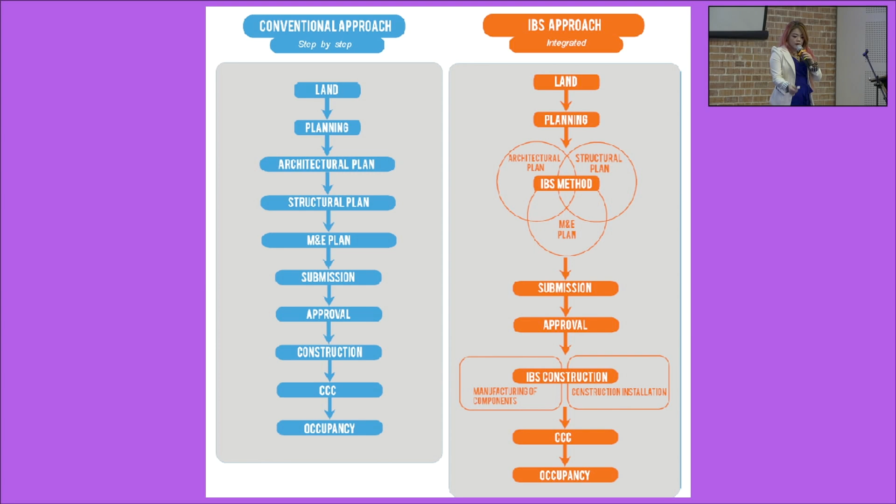So I have to touch a little bit on this, because in October 2020, we still suffered the pandemic since we shut down everything in March 2020. I was lucky to be offered to speak on an international platform, and I was the only Asian woman, youngest among all, talking about topics like that. But I thought, enough about the healthy environment, because I believe all the other speakers would definitely talk about green building, which doesn't really help what we as architects suppose to move forward. So-called, you've heard before during the pandemic, people say post-COVID architecture, post-COVID house buildings, whatever.

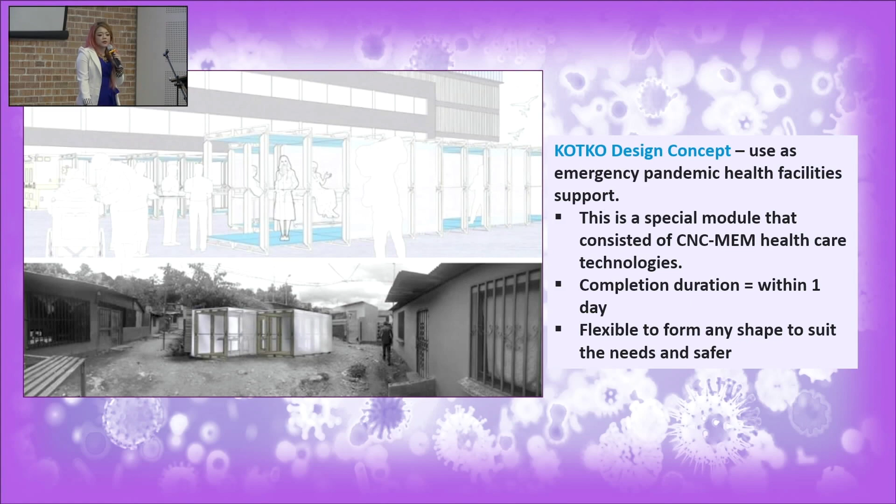I'm sure next time Hafiz will come and tell you my wall can be like this, every shape you want. I'm sure, because the future is like that. Otherwise you'll be kicked off from the trends and the community.

So of course it's very popular, because it's fast. You can do your internal wall, you can do for the windows, everything. Everything has to be done according to your design, and not just design, but specs - what sort of windows, what sort of glass, and any other things that will actually be within the panels itself. So all information is put in, then it's done.

So it's a lot easier, piece by piece coming in. That's why things can finish in a month, or in 100 days for bigger projects. People go for that because of less workers, faster, stronger, soundproof, heatproof, fireproof, reduced wastage, more cleaner, easy installation, and all this.

But throughout these kinds of systems, when things move on, to me it's all the same - smart buildings, IBS, or even AI - it will still come back to the same fundamentals, which I'll tell you in the next slide.

So you see improved quality definitely, because getting labor has become an even more challenging issue, especially with the pandemic. For construction sites you need people to come and work, and that's a problem, plus whether their workmanship is good is another issue. So having this system, they already promise you that in terms of quality and workmanship, everything is guaranteed - at least it's much better than this.

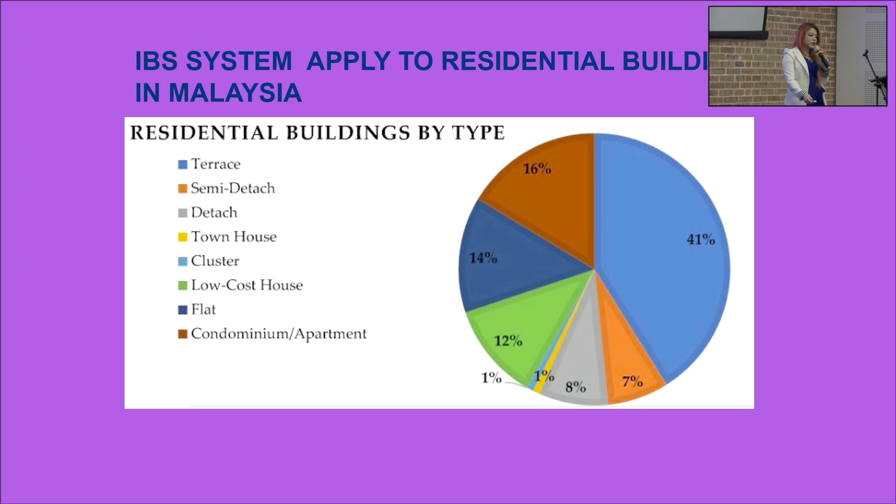So we don't want too many complicated things to affect the so-called aesthetics and everything. So to me, IBS system is the same, we need to resolve certain problems like I highlighted. Then only we can actually move on, in order to help them, to also help us, so that we can move on and also make this IBS system much more flexible and have more choices for us to do in our future design and everything.

So I have to relate back to the cell modular - this is something else I shared back in October 2020. Now you can see it already in Malaysia, not many, but if you go to Genting Highlands, some of the commercial area near the premium area has some restaurants that offer outdoor modular setups. It's not a full thing, but it's a modular setup for you to enjoy your meals out there.

So all these technologies, where do they come from? I've seen it in China - so many, they've been using it worldwide. Everything comes into the system - solar panel system, you want to cook, lighting, everything, including IBS system, toilet system, everything. And the best thing is they also offer the flexibility to move around, something to hook on, then they can move around. So it's like mobile things, modular things.

Why did I look at this in 2020? It's the way we're moving into the future. Because especially for people staying in high-rise buildings, you realize you need to see the green, you need to engage with nature.

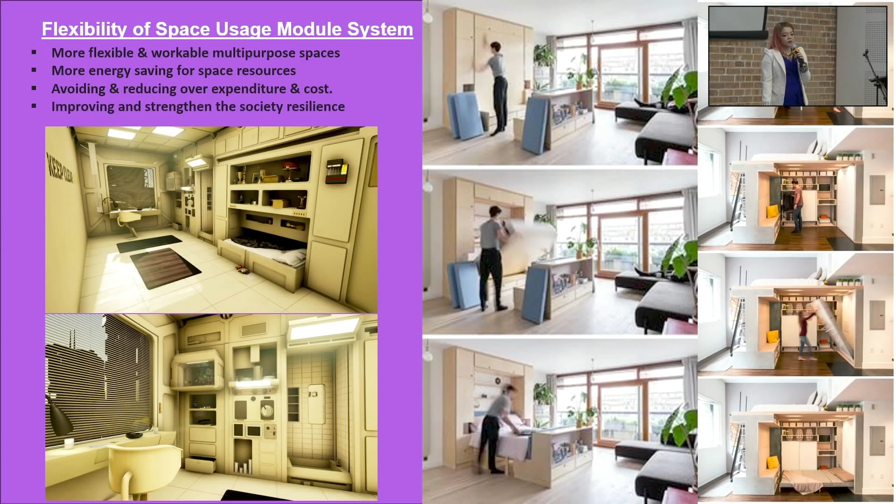That's what I'm saying. So now we talk about artificial intelligence. People are afraid of that - AI revolutions, how this AI is going to transform our world.

It's already long time ago, a long time ago. The moment you approach your first computer, that is the time they're already with you. The moment you have your phone, either it's a big Nokia or whatever, they are already with you. Now they become smarter and smarter. And you have your Apple Watch, whatever watch with you. You have iPods, everything - so they are all with you every time.

It's just that they are very, very tame. They only provide you certain things when you ask, like a GPS. Last time we don't have GPS. You open the map book, you lipat, you sambung, then you go and mark out where's the landmark, then you find your road. Now everything you rely on GPS.

Sometimes GPS don't work very smart. I tried that, then I open up Waze - also cannot. So I end up having to open both, both together. Also cannot 100% trust them, because both of them will send me to somewhere else, especially this, this is really my own experience. Everybody says, oh, then you open Waze. I say no, I try to trust all these things, but they send me somewhere else.

Oh, you have to pay your tuition fees on the roads, okay, throughout. So then again it comes back to - your brain is the most reliable. So sometimes I turn both on, and they're proven again, they're going to send me somewhere else, and I try not to follow - I follow my own way. Then I just talk to them like, stupid GPS, something like that.

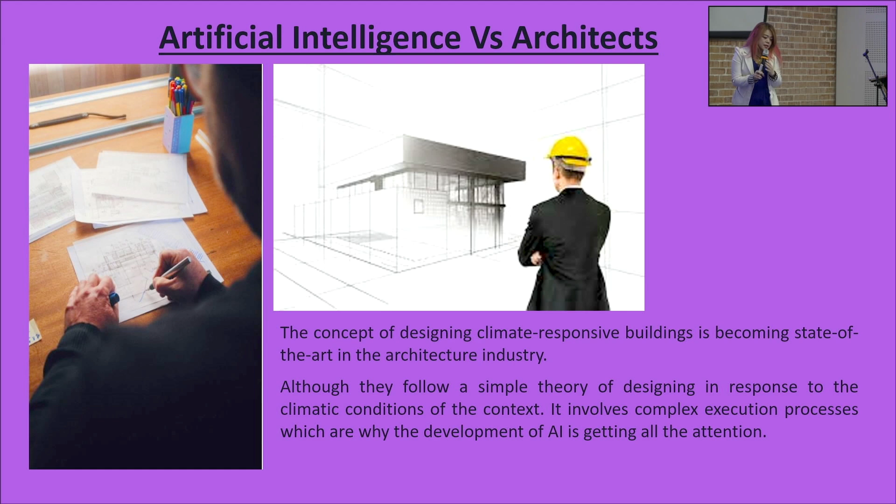So what we do is use these improved machine learning, or so-called AI, to help us, because we don't want to waste time doing what a lot of things we can actually leave to these tools to do, all right? AI functions to help computers mimic human intelligence, making them think. We can use AI to teach the so-called ML, the machine learning, to feed in information for you, then the computer thinks and comes up with things for you, and then makes - or I wouldn't say makes important decisions - they tell you suggestions for these decisions, master. This is my suggestion, option 1, option 2, all right?

Machine learning empowers computers to learn from all the data you put in. Everything's a software - like Revit, you need to build your libraries. No libraries means the software itself is brainless.

But if you put in all these things, plus AI, they will even suggest solutions. You tell it what design and concept you want, and they help you put out everything and get it done - a solution, a proposal for you. That's how wonderful it is when you see it - your life suddenly becomes a lot easier.

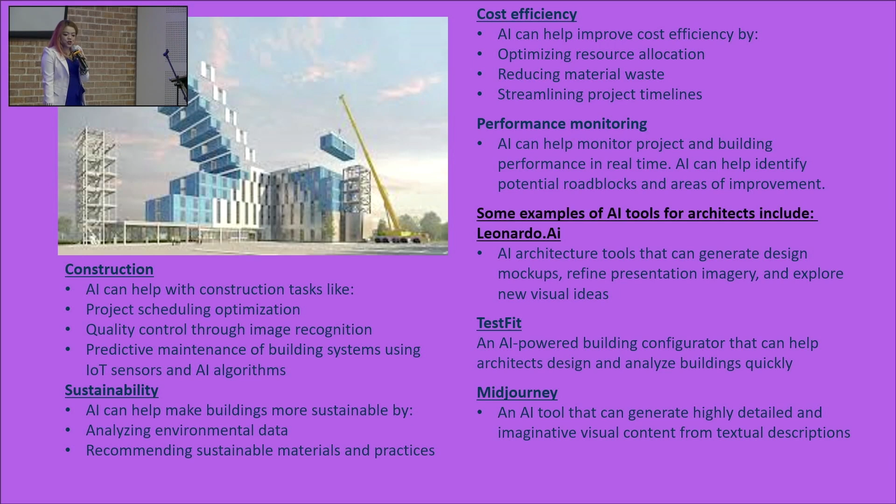TestFit, yes. I found there's another tool called Leonardo AI, an AI for architects. Try it out and see what's going on. Midjourney, yeah, is a tool to generate highly detailed imagination, visuals, everything.

Then you go back and tell the AI, my client wants this, and he wanted this, and I'm thinking to offer him this kind of concept. Ask him to do it. He will help you keep all the information. Unless you give a wrong direction, then he gives you something else. That's why it always comes back to your instruction.

So when it comes to the design development, he will show you everything - is that what you want? Then you have to look at it and decide whether this is what you want. This is the importance of our role as humans, as architects, to tell them no. So you see, who is still the boss? We are still the boss. We will tell the machine, no, I want it like this, no, I want it like that.

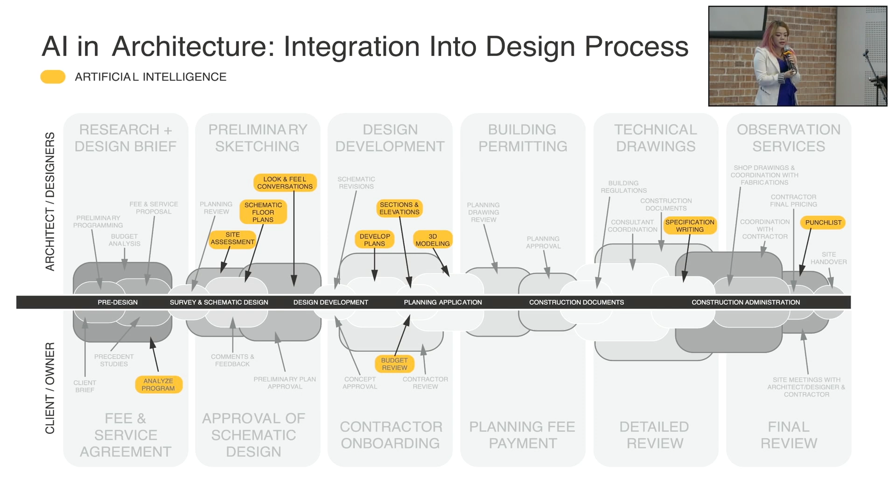When it comes to fee services agreement, this is part of our business. AI can help us analyze some of the programs - the so-called program means data collections, and you might keep other things if you run the business. I'll show you that because there are things that may help in terms of our business. So again, AI versus architect - not to worry, because why?

Architects will be expected to work with them, assisted by them. We will be expected to understand how these technologies are used rather than using traditional software. Our traditional software is still there - you can name thousands, dozens of software. And whoever uses it, even now, whatever version they come up with, they show it to me. During my time as an architect, when I look at it, no, it's still imperfect.

You just add a few elements and charge me extra, not just 100 - my friends, you know what the price is, right? All this - so no way. I told them straight to the point, no. I said you tell me you add this, but it doesn't help me at all to solve my problems. I said no, that's not the solution. Then I just walk off. That's it.

So of course the situation is to let the architects gain entitlement, to equip the skill. That's why I say we cannot stop learning. If you stop learning, you gone case, really gone case. Then you don't blame AI take over your thing, AI this, AI that, because you end up blaming and sit there, then you slowly just will be trashed out. So in our industry we will have to keep on learning, and that's how we compete.

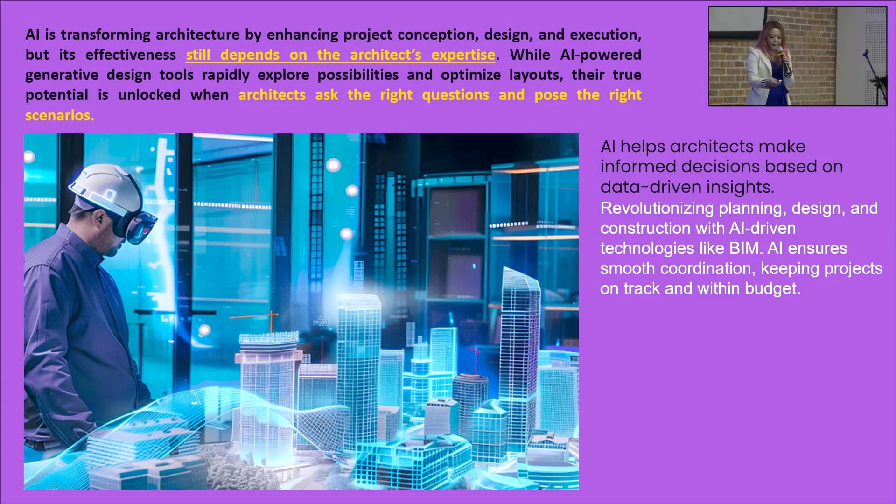So come to the business side. This is more to, just now we talked about design and everything, but come a little bit to business. We have to be a solutions architect - not solutions to the building design we provide for the industry, but our business also needs solutions. Otherwise we cannot just open our mouth and eat the wind, right? We still need to eat something, at least buy our mineral water and bread, whatever it is. Professional architects, we are responsible to organize our business, whether you're a big company, medium company, or small company, that's the same.

So about ambiguities - there's a survey that found 65% of people thought they knew what to do. So they set up the company thinking they know, they go do it. At the end, the result comes out, and they're also not so sure whether this is what they want. See, that's the problem. 65% sounds maybe not too many, but actually it's a lot. When I shared this information, people told me, yeah, then you fall under this 65% too.

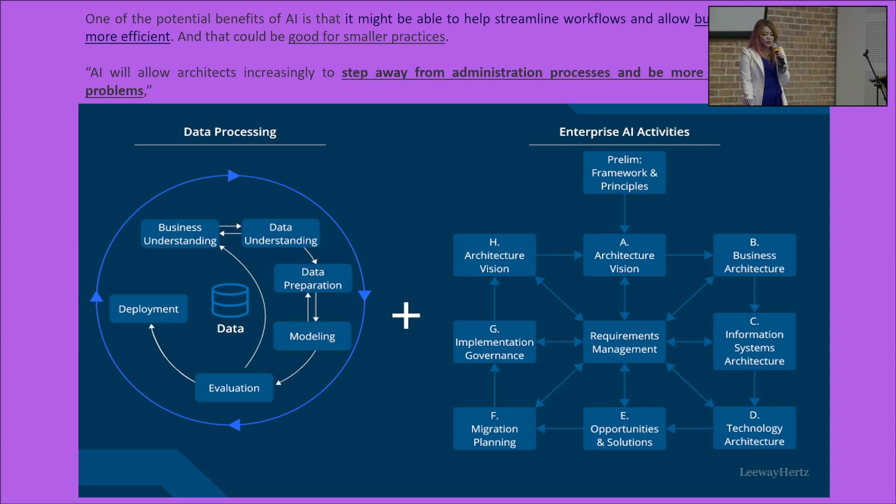Future is us. As long as you're alive in this world, you're facing future. Every day is future, tomorrow is also future. You wouldn't know what happens tomorrow or even the next hour. These things are happening, so when you have all this set, you put them into the situation.

You have the business architecture, you organize everything, you have the system information, put in everything accordingly, plus some technologies you want to put in, solution, data application. Then come to people, human skill, competence building, you put in everything. So it's not just your business, it's also part of your professional service.

So the question again, after sharing what I'm thinking, do you worry that architecture will have scope in the future? Yes, but of course there are challenges. So what are the challenges? Creative limitation - how original is AI generated design?

So you're worried about creativity, but I will say this worry will end up with people that are too reliant on the machine.

These machines are very wonderful, super wonderful. As I said, they are super patient with you, they can do everything with you. Anytime you call, they answer straight away. It's like sometimes you text people and they don't answer, until 2-3 days later. This one answers immediately, and if you don't reply, they won't get angry with you at all.

See, this is the wonderful thing they can give you emotionally. But that's a problem - the problem comes when humans get too attached to this kind of thing.

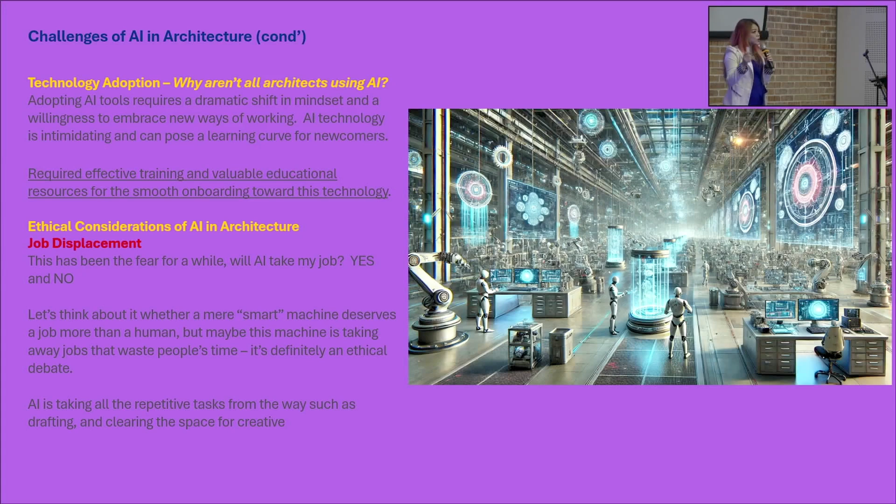So, architecture to me is just an art, and we live in the future. We are the architects, we are the human, so nothing to fear. Hand in hand, machine and humans work well together, giving more accurate results than working alone. Working alone, you can never reach your boundary very fast. It's not efficient anyway, so we need them no matter what.

If you don't need them, then it's up to you. Our world is moving and it's not going to stop because of you. So choose to work with that.

I'll be very happy to have this in my office. So I guide them, ensuring the design is efficient, whatever. Then they work 24/7, and I can go back and sleep. I don't have to work overtime anymore. That's how good it is, right? So do not fear of that.

They will only take out certain jobs, certain parts of our so-called scope, which actually don't require us to spend time on. You only do that during student time because you need to know it, then you practice, yes, you need to know.

So some young architects may worry, thinking 'this fellow can draw already, man.' Don't worry, you learn. Because why can't they go to site? They cannot make decisions, okay? So still, as long as you're architects, okay. Other professions or others, I have no comments on that.

As I said, in this world, now the game is surviving. We are the survivors. So who will be here until the future? Then you are the survivor. So that's it. Thank you.